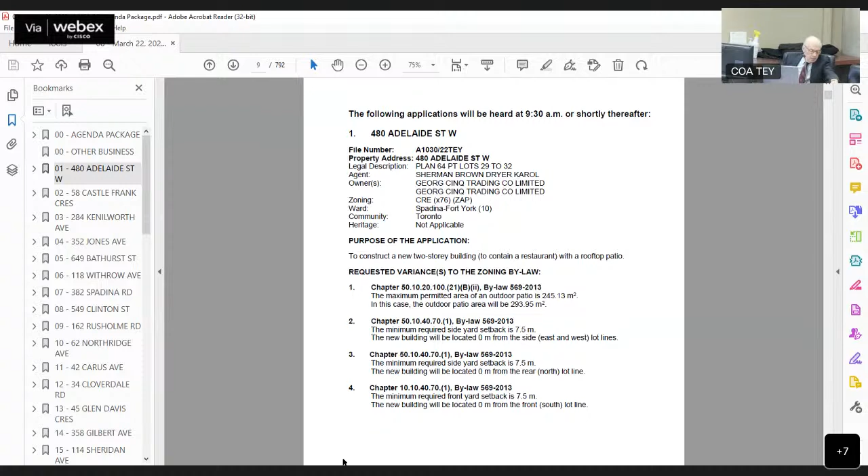Mr. Brown. Morning, Mr. Chairman and members of the committee. I'm happy to tell you, as of late last night, you probably should have had a letter from 490 Adelaide indicating that they've withdrawn all objections, so we've resolved their concerns. I'm also wanting to start out by saying thank you to staff who really did a great job in working to provide responses on our application, Simon in planning and the urban designers.

It resulted in the landscape plan that's before you. Jacob from the committee has done a great job, and Nicole and Sabrina. So I just think that ought to be said at the outset because they helped us get through the process.

Mr. Chairman: Is Mr. Artenozzi on this call? Mr. Brown: I don't think so because they signed off. They sent a letter of support in last night. Okay, thank you. Thank you.

And he and his clients and our client and myself met into the late hours and figured out a resolution. So they're pleased with the landscape plans we've shown, the site plan we've shown. I can take you through the slides that we presented. It's fairly straightforward. They're taking down a 4-story building and putting up a 2-story restaurant use with a rooftop patio.

Staff asked us to do detailed landscape plans, which we did. That was sort of asked for late in the day, but in any event, our landscape architects did a great job in getting city staff what they wanted, and you have a report that has conditions that we support.

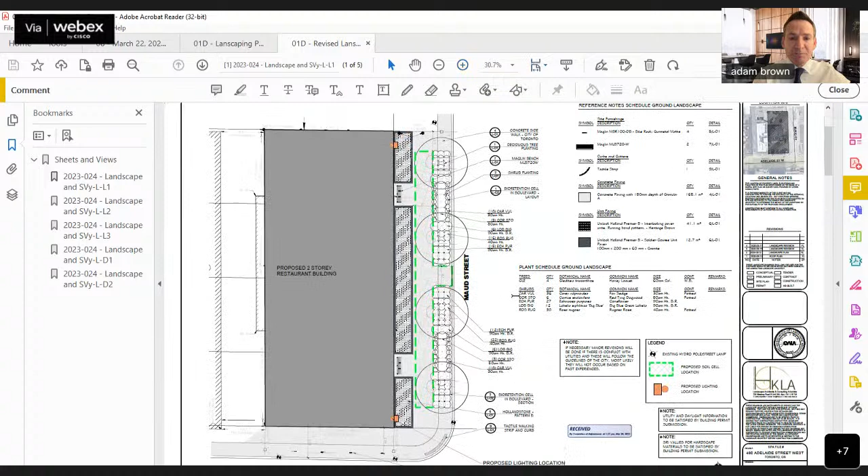So they're both from HKLA? Is it at different levels, is that what I'm... We added more improvements, got this material really late, so I apologize for it not being up to date. It happened late, we got the request about a week ago. So there was a second set of HKLA plans because they wanted more detail on the streetscape.

Oh, okay, so it's basically the same indicated proposal, just with more detail. Correct. Okay, thanks a lot. Thank you. Okay, any further questions, comments?

Odd, go ahead, Nimrod.

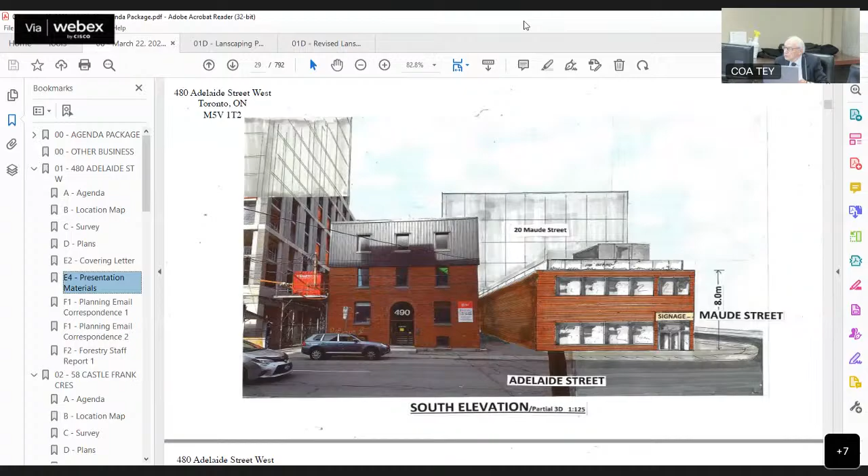I think that the variances before us are minor in nature. I think the development is appropriate, and I would move approval of the variances subject to urban forestry condition number 3 and subject to community planning conditions. I'm not sure if we need to specify which landscape plan we're referring to in those conditions.

Seconder? Is that here? All in favor? Have your approval. Thank you, sir.

Excuse me. Mr. Chairman, I cannot hear you. I can hear everybody very well, except the chairman. I'm practically swallowing the microphone. Can you hear me, Yim? Yim, can you hear me? Yes, better, much better. You have to speak really close to the mic, I think. Well, I can't get any closer. Okay, all right, thank you, otherwise you'll eat it, right? Thank you.

All right, number 2, 58 Castle Frank Crescent.

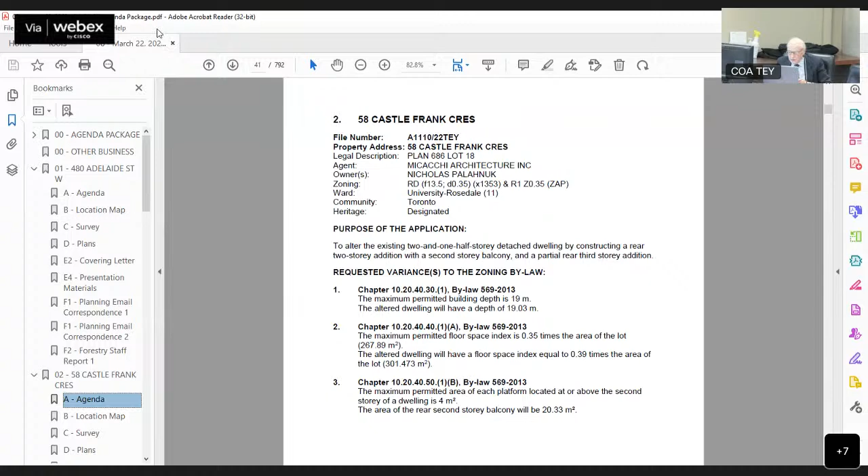Thank you. I don't think we need a presentation. I have one question with respect to the variance number 3, the size of the balcony. Is it 5 times the area as permitted? That's correct, yeah.

We did submit an extra page just highlighting some of the two other balconies on this street that were also approved previously as precedent that were greater than ours. And then in our drawings, the last page is a 3D perspective that shows what we're proposing.

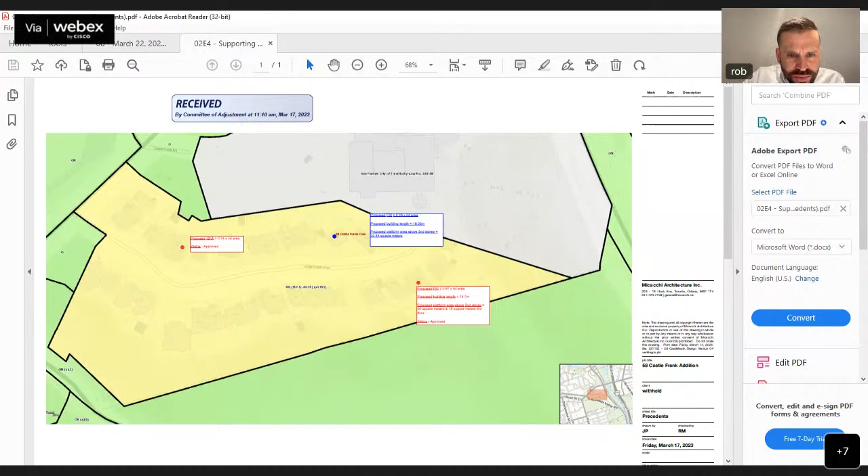So with these two, so I can't read the numbers on there. Let me pull it up myself.

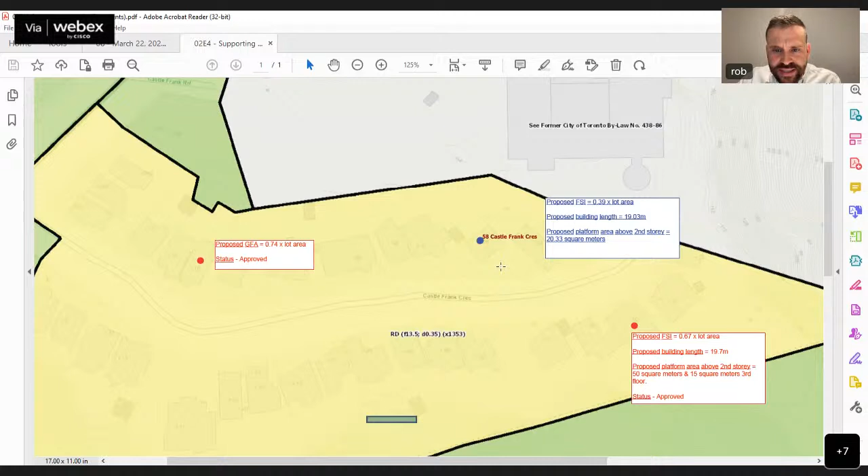So that is for 65 Castle Frank across the street, and then 2 houses to the east. That one has a second floor platform of 50 square meters, and then a third floor platform of 15 square meters. And then at 18 Castle Frank, which is 6 houses west of us, oh sorry, I misspoke, that one's just showing that the GFA is greater. So we have one precedent for

second floor platform across the street that was larger. And then we've included a rendering on the last page of our drawings that shows what this addition would look like. We're limiting the shape of our balcony to be closer to the side wall of the neighbor to protect the views of our neighbor to the east of us. That would look more into their backyard. So the balcony is just located on the west side only of the second floor.

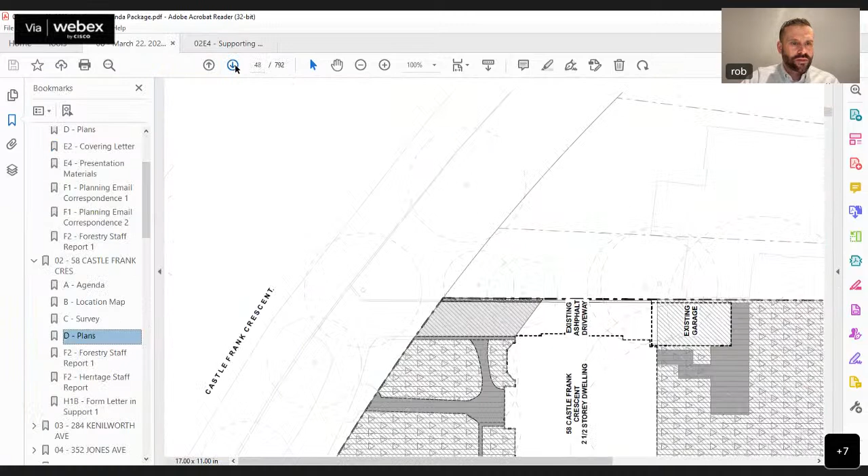So I think the last page of this PDF is maybe helpful to see. Yeah, this page. So on the second floor, there's this kind of a bay window or this framed thing that sticks out a bit, and then the platform, the balcony is just limited to be in front of that area only.

What about overlook? So maybe if we go back to the second floor plan or the site plan, what we can see is there's a house, like all of these houses are kind of angled a bit. And so the balcony that we're proposing is on the west side. So the house to the left of us, we're kind of close to their side wall.

We spoke to that neighbor. We reached out to everyone in the neighborhood. They didn't have any major concerns. We showed them a rendering of what we can see from the balcony, and they have mostly trees that obscure the view, or just the side of their house.

And then because our balcony is so far over to the west side, the neighbor to the east, where we could see into their backyard, we've pulled the balcony edge back so that the rest of that addition is blocking the view down into the backyard.

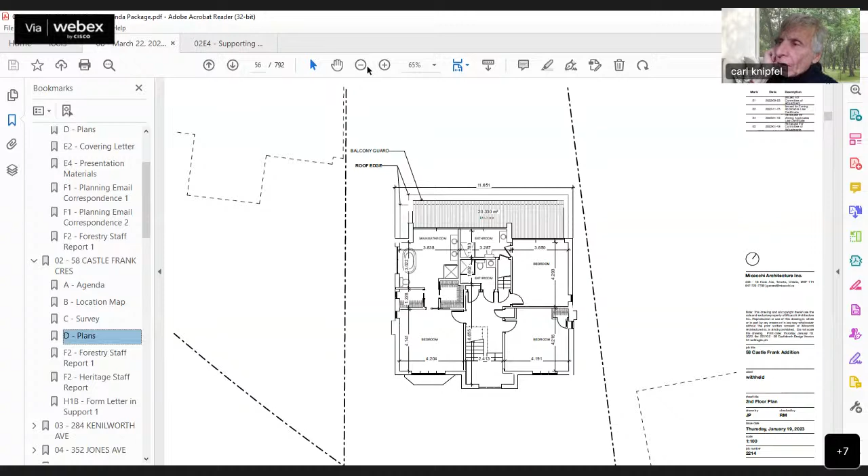It might on the second floor plan show the outline of that more clearly. Excuse me, I'm now confused. You keep referring to the balcony being closer to the west property line, but it's actually closer to the east property line, is it not? If you look at the survey, the garage is actually on the west side, correct, and the balcony extends further to the east.

So to the chairman's question, there is, I would argue, a privacy concern to the east, and the balcony needs to be screened on the east side. The other issue is the one you mentioned, which is precedent. The bylaws require that balconies be really limited in size, and your justification is that the committee's approved bigger balconies before, which would just add further proof that we should have bigger balconies, contrary to where the bylaw is going. Can you explain why the balcony is as large as it is?

I realize you've got a fair size rear yard and it's a fair size building, but the balcony is pretty big, and I'd just like to get your take on why it's that size.

Quite simply, it's just the roof of that addition, and it was just something to walk out onto. I don't think it's going to be used that much, but we wanted to finish the top of it, like from the bedrooms. There's one bedroom with a view looking back, and we didn't want to just see a flat roof. We wanted to cover that in nice decking instead, and maybe have a big potted plant out there. Yeah, that's pretty much it.

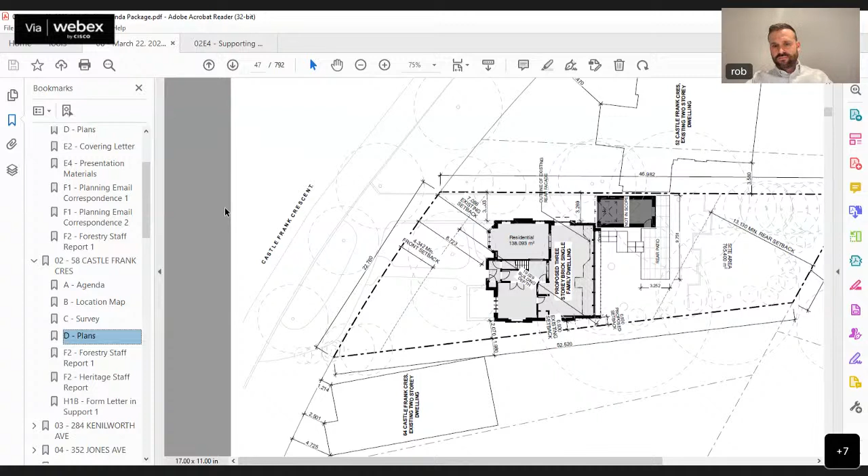Okay, any further questions, panel? Any comments? Yes, Yim? We're in committee now. I can make a couple of comments. Can't hear you, are we in committee now? Yes. Okay, I have a comment to make.

The size of the balcony sort of stands out to me too, but when I listen to the explanation and look at the site plan, these sites are staggered, and the applicant said they have talked to the neighbors. It's staggered in such a way that you really have to turn to stand on the edge and turn back to look at any of the backyards. In that sense, I do not think there's a privacy concern. But if some members think we should put some privacy screen on the west side, I do not object to that. I can support this application because besides that, I think the variance is minor in nature.

Further comments? Yes, Carl? Thank you, Mr. Chairman. Unless I've got the wrong information, which is possible, if we look at the drawings, I think it's the east side that needs screening, not the west side. The west side, the houses are staggered, and the balcony is set back from the property line on the west, which I don't have the number for, but I don't see a privacy concern to the west. I see the privacy concern to the east.

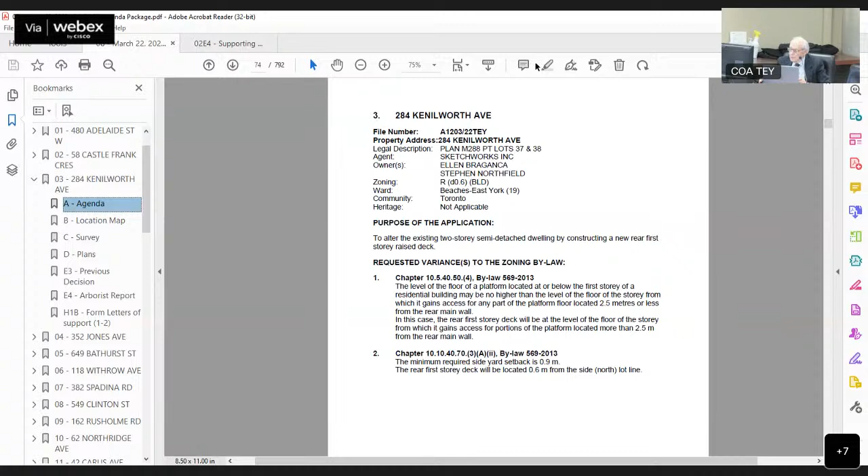Thank you. Panel, any questions? I didn't have any questions. I'm ready to put forward a motion unless someone else has a question. Any questions, anybody else? Yes, Carl.

It's not a question so much as a suggestion. Nimrod, I don't know whether your motion is going to have conditions, but I would argue that we need to have screening on the north edge of the deck. And I had a question for the applicant: is whether the deck abuts another deck on the south side? The deck, there is a gap between the deck on the south side. It is not directly attached, but the neighbor does have a deck as well.

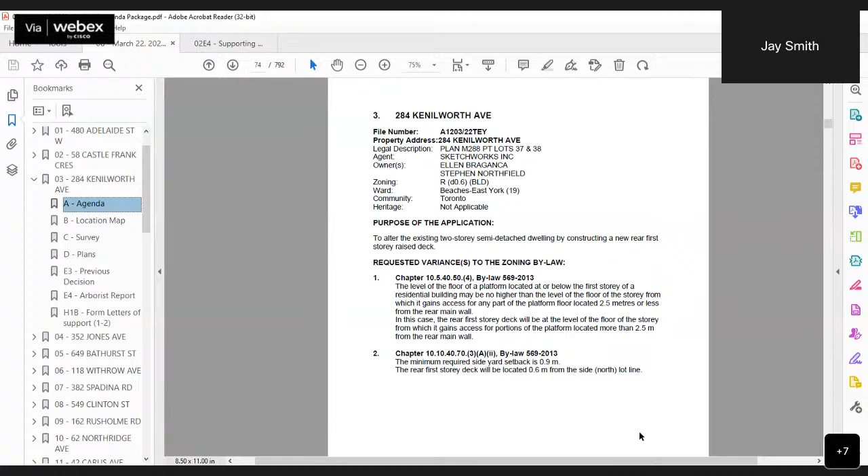Given the topography of the land, we're almost 9.5 feet from ground floor to the backyard. So a lot of these homes do have decks, and I would have no objection to screening on the north side. So then my question was, do you need it on the south side as well, or is there already a screen there for your neighbor? The neighbor does have a screen.

Okay, good enough, thanks. Sorry, Nimrod. No, that's great. So I'd like to put forward a motion to approve the variances. I believe they are minor in nature, and I note that there are letters of support from both adjacent neighbors. And add a condition that there be privacy opaque screening on the north side of that deck.

Carl, you second that motion? Yes. All in favor? Have your approval, sir. Thank you, Mr. Chair. Number 4, 352 Jones Avenue.

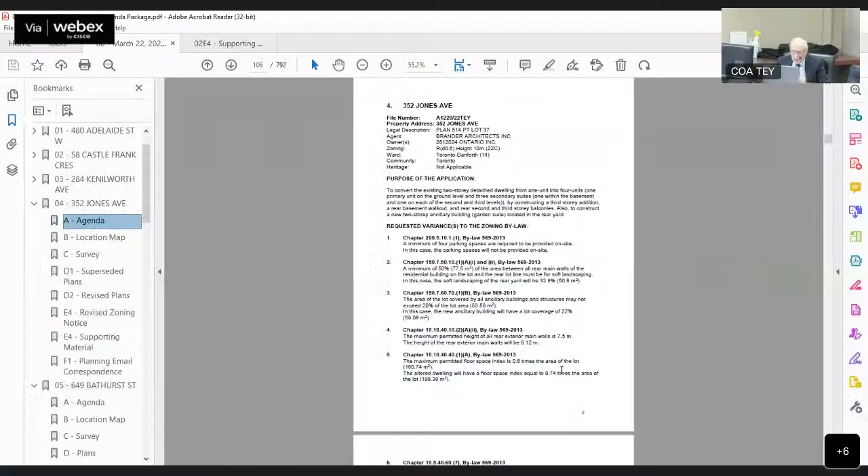The purpose of the application is to convert the existing 2-story detached dwelling from 1 unit into 4 units: 1 primary unit on the ground floor and 3 secondary units, 1 within the basement and 1 on each of the second and third levels, by constructing a 3rd-story addition, a rear basement walkout, and rear second and 3rd-story balconies. Also to construct a new 2-story ancillary building, a garden suite located in the rear yard. With this application, we have material submitted by the applicant, correspondence from planning, and support from someone whose address is unknown, Mr. Brander.

Adam, you've been unmuted. Good morning, Mr. Chair and committee members. My name is Adam Brander, and my address is 49 Bolton Avenue in Toronto. I'm the agent, the architect for the proposal at 352 Jones Avenue. Okay, so there is someone registered to speak, not necessarily in opposition, but I think you better give us a brief presentation, sir. Certainly.

Just to update first, if we could: the public notice originally indicated 6 variances and updated zoning notices are on the file. If I could transcribe what that means for the public notice: Variance 1 should read 1 parking required, 0 proposed. Variance 2 proposed is reduced to 33.1%, or 51.3 meters squared for rear yard soft landscaping. Variance 3 for the garden suite coverage is removed. And variance 4 for the permitted height of the rear wall should read 7.5 meters is permitted, where 9.12 is proposed.

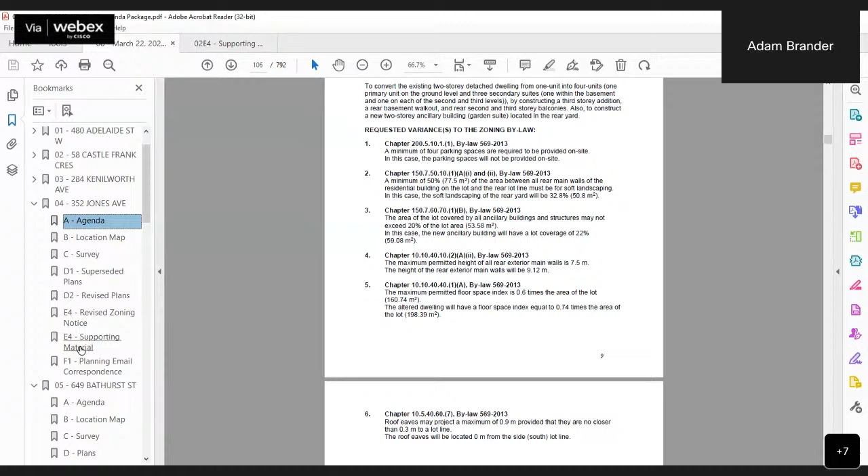If we could bring up support material sheet 4, please, just a couple pages down. Yeah, the outlined area in blue there is a pre-existing neighbor vehicular easement that wraps around the property, but technically is on the subject property. And because it's in favor of the neighbor, there are no permissions to alter or provide soft landscaping in this space. Our zoning examiner actually went back to the source on this item and consulted with the planners who wrote this recent bylaw. And those planners said there's actually nothing explicitly written into the bylaw at this point just yet for these instances. There's a recognition and an acknowledgement that it's an issue to be resolved. They felt it was something that could be explained at committee for the time being.

If we were to exclude the right-of-way area from the rear yard, the proposed percentage of soft landscaping would be 44.6%, where 50 is required. Or if we were able to landscape that area, it would be up at 58.9%, an as-of-right condition in that qualification.

Additionally, the proposed soft landscaping in the rear is actually an improvement over the existing condition. With that back and forth with planning and zoning, planning had no further concerns with that. These are my initial submissions in support, and I'm happy to answer any questions.

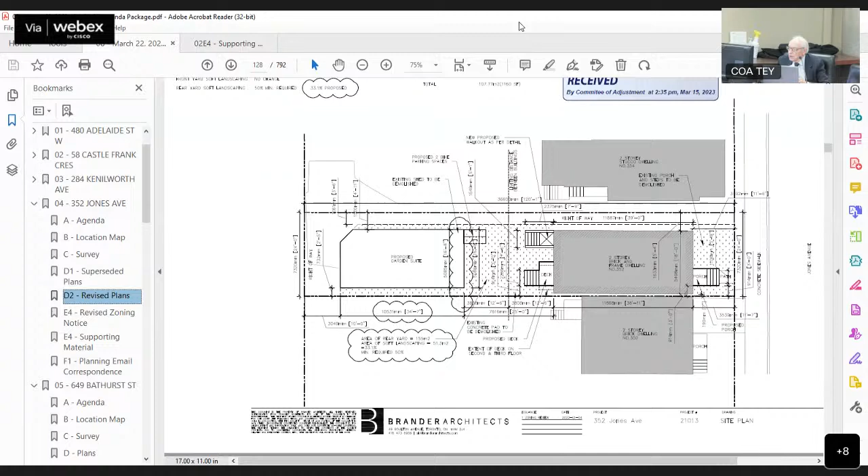I have no more comments, and I think it's good that they have deleted variance 3. I'm actually quite impressed that they're putting a garden suite with so few variances concerning the garden suite. I think it's a good approach, a good project, and I'm in support of the amended agenda.

I think they already proposed the privacy screen. I do not need to put it as a condition. So that's my motion.

Okay, it'll be as amended, Yim? Yes, I mentioned that. It's amended. So, planning condition, is that screening? I think they have proposed it on the plans. That's privacy screening already. They have it on one side, yes. Carl, did you second it? Yes, I'm pleased to. Okay, all in favor? Have your approval, sir. Thank you.

Thank you. Number 5, 649 Bathurst Street. The purpose of this application is to alter the existing 2 1/2 story semi-detached dwelling by constructing a rear third floor addition with a balcony. There will be 2 dwelling units on this lot, 1 primary unit as well as 1 secondary unit within the basement. With this application, we have material submitted by the applicant and correspondence and concern or interest from 651 Bathurst Street.

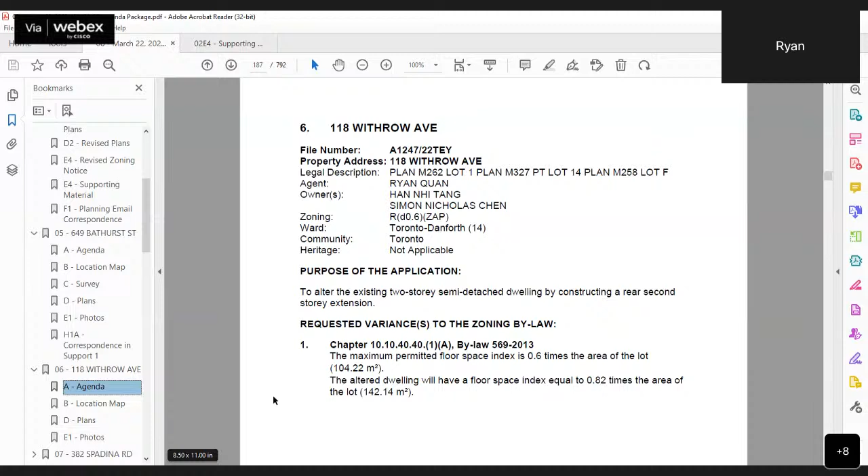Hello Ryan, you've been unmuted. Good morning, committee. My name is Ryan Quan of 29 Torrens Avenue, agent for 118 Withrow Avenue. All right, I think this is very straightforward, I don't think we need a presentation. Panel, do you have any questions?

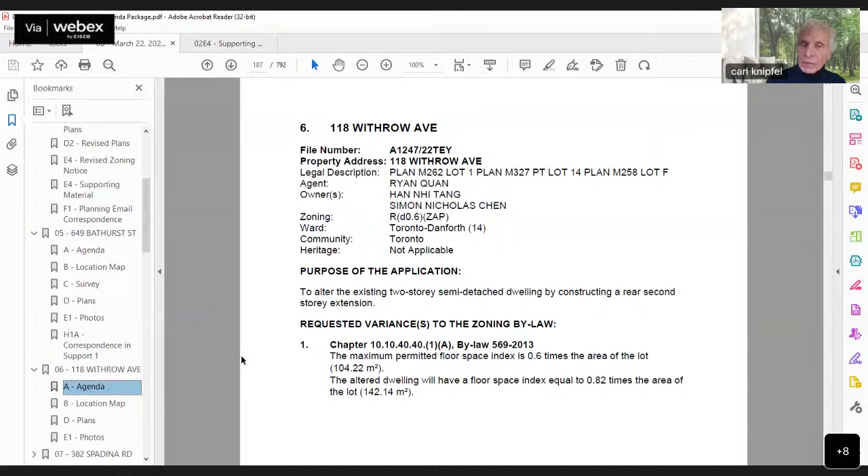Carl: Thank you, Mr. Chairman. Mr. Quan, a very quick question, I had some difficulty with your drawings. The purpose is a rear second story extension, is it a 2-story extension or is it just on the second floor? It's just a point of clarification. It's a second floor addition over an existing 1-story addition. Okay, that's good, thanks very much.

Do we have, yes, Nimrod? Yeah, I'd like to move a motion. There's only one variance and I believe it is minor in nature. I would move approval with no conditions. Seconder is here, all in favor? Im, are you in favor? Yes, okay. The application's approved, sir. Thank you, committee.

Do we have Mr. Yu? Don, have him? Excuse me, I apologize, could you hear me right now? Tony, can you speak closer to the microphone please? Oh, I'm so sorry, could you hear me right now? It's kind of like Microsoft, we need you to... speak up, sir. Yeah, could you hear me? I'm sorry, the microphone doesn't seem very clear. Yeah, now we can hear you. Oh please, I sincerely apologize.

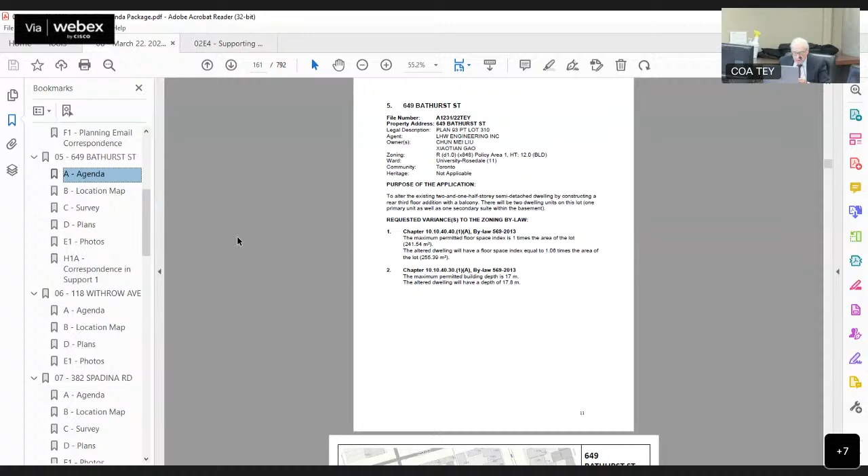Good morning, Mr. Chair and the committee. My name is Tony Yu, and I'm the agent. My address is 2347 Kennedy Road. I'm here today on behalf of the owner of 649 Bathurst Street.

Okay, can we have a very brief presentation as we have some opposition? Sure, for sure, please let me briefly introduce this application. The application was intended to do an interior alteration and propose a new flat roof on the existing roof. The reason that two variances were triggered regarding the building length and the FSI is because there is an existing two-story addition that hasn't been legalized yet.

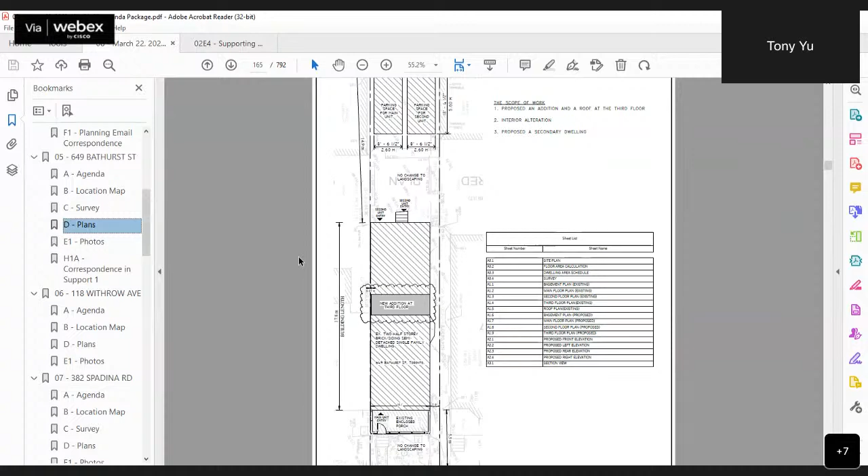If you look at the survey, could you pull out the survey please? You can find that about 2.5 meters metal siding addition on the rear, which does not match the city record. The owner bought this property about 2 decades ago, and this addition was already an existing structure back then. During the last 2 decades, the addition has not imposed any dangers like drainage or shadowing issues. Therefore, I'm respectfully asking for a relief to the variance of the building length and the FSI in order to legalize this rear addition. I'm happy to answer any question.

Thank you, so there's actually no construction at this time, well? Only a propose flat roof on the existing roof, like a dormer, flat roof dormer on the existing roof. So there's no further violation or construction except the dormer on the 3rd floor.

Okay, alright, Zahir, you have a question? Just a quick question, is the balcony on the 3rd floor an existing one, or is this one supposed to be built as well? Because there's no screening as far as I can see on either side. Well, this balcony is the new one, and there's only 1 meter depth, and this balcony hasn't triggered any variance. But the owner would be happy to add the privacy screen on the side. And that would be north and south sides? On the north side. And south side? Yeah, both sides is fine.

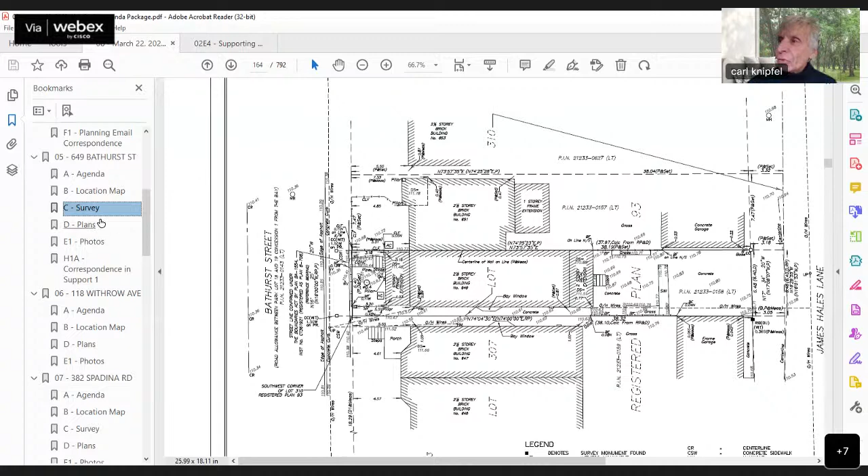Both sides, thank you. Carl, did you have a question? I just wanted to clarify, Mr. Chairman, you asked the applicant if there was any new construction and he said no, but in fact, the balcony is new, and so that is new construction. The other issue I think is, I'm not sure that the screening on the edges is necessary based on the location of the adjacent properties, but it's not going to hurt. The larger issue to me would be to tie the balcony to the drawing, let me see, drawing A19, which is the 3rd floor plan. The reason for that is because the balcony is contiguous with a roof, and so it would be very easy to basically use almost the entire roof as a balcony. I presume we would like the balcony to be as shown on that plan, so I think that might reasonably be a condition. Okay, alright, Wing Chan.

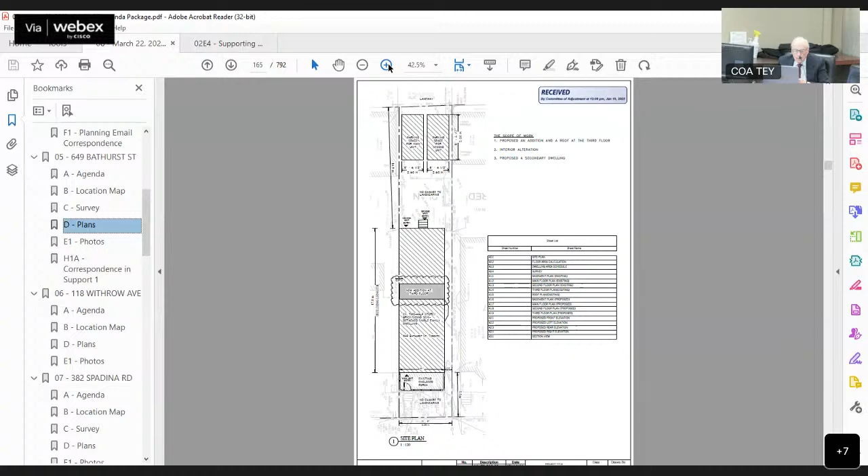Could you tell us what your concerns are? As stated in our letter, our main concern is the privacy of the additional balcony being built, very close to the bedroom window, and asking if we could have additional privacy screens on the north side, so that we can protect privacy into the bedroom window. Additionally, because the construction is directly above our entranceway where we have young children going in and out often, we just wanted to see if any conditions can be put in to protect that space during construction. And thirdly, just because we are attached to the house, we're just concerned about general protection of the roof and structures as the owners do the construction.

Well, we can help you out with a privacy screening. We've already addressed that issue, and it'll be part of any motion, but we can't address the construction issues. It's not part of our mandate. You have to discuss that with the neighbor.

I don't know if there's going to be any more construction. Is the balcony there? No, it's not there right now. Well, then you'll have to address construction issues with the neighbor. Okay, thank you. And I appreciate the consideration for the privacy issue and the offer from the neighbor to put in privacy screens. All right, thank you.

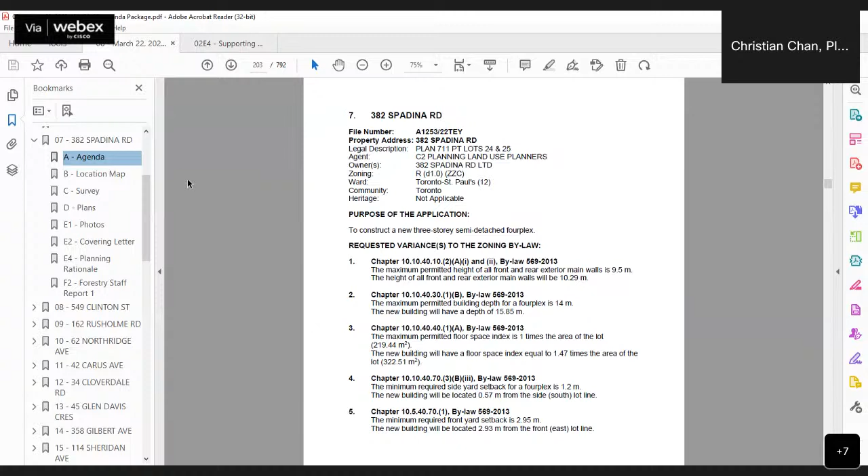Thank you. Panel, any questions? Comments, or do we have a motion? Carl? Mr. Chairman, could the applicant clarify that there's been consultation with the attached semi? We've consulted with city planning as well as the attached semi, so there isn't any concerns noted in the file record on the AIC. And also just to note that we did have a brief conversation with urban forestry just to make sure that the conditions are going to be satisfied.

And the other question I have, it appears to me, if you look at your front elevation drawing, the stairway is really dominant. Do you have any perspective drawings that would indicate the stair in your presentation drawings? Are they fairly accurate? Because the stair recedes from view since it's up 3 stories from the ground. Sorry, sir, are you speaking with regards to the basement stairs going to the basement unit? No, the stair to the roof. The stairs to the roof, yes. If you can go to page 10 of the planning rationale, there is a front elevation view.

That shows a perspective of the proposed roof enclosure that accesses the roof deck. It is receded back from the point where the sloped roof goes up, matching the adjoining building, and then it's stepped back to reduce the appearance of that massing onto the streetscape. So that's not immediately apparent when seen on the front elevation. Yeah, that's the point I wanted to clarify.

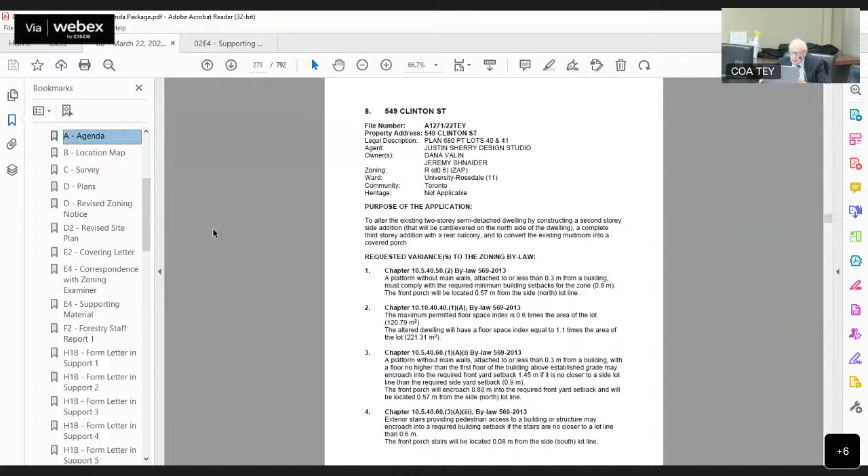Off the top of my head, I cannot recall. If you give me one moment, I can let you know. The current gross floor area index is 78.35%. Okay, so we are currently over as well. Yeah.

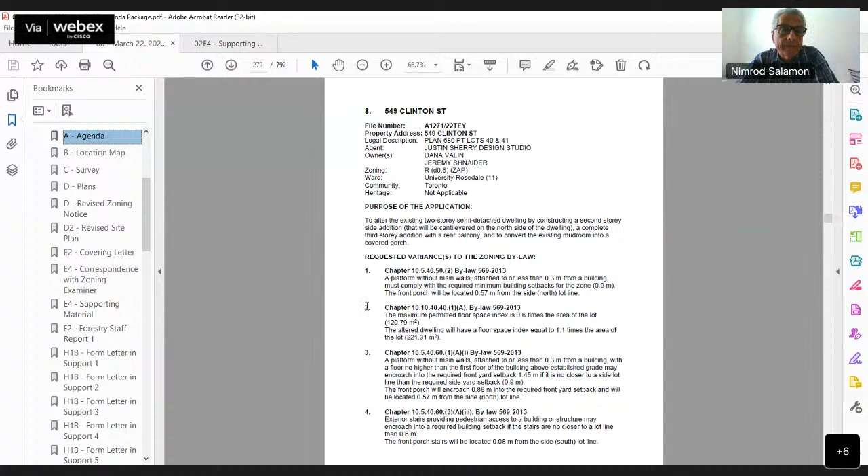Mr. Chair, I think, is there an amendment being made to variance number 6? I think there was some letter to that effect. Through the chair, if the applicant can please go through the requested minor variances as per the revised zoning review that was received, just to clarify if any of the variances have changed from the original public hearing notice. Yes, so number 6 in particular is the only one that changed, and that's with regards to the soft landscaping.

In the existing condition right now, it provides 0% landscaping. We are currently adding an additional landscape area. It seems like this one is the old one, but we are adding some soft landscaping to the front. If you give me one moment, I can let you know how much that is.

So we're going to add another additional 29.82%, whereas we have 0% currently. Are there any other changes to variances? No, that is it. Okay.

All right, panel, do you have any further questions or comments? Yes, Carl. Would the applicant have any concerns with screening the balcony on the north and south sides? There will actually be some screening on the south side as it's semi-detached. In particular, there's many houses on that street that do have that same screening effect. On the north side, I'm sure the client would be happy to have a screen, so we can add that in. Thank you.

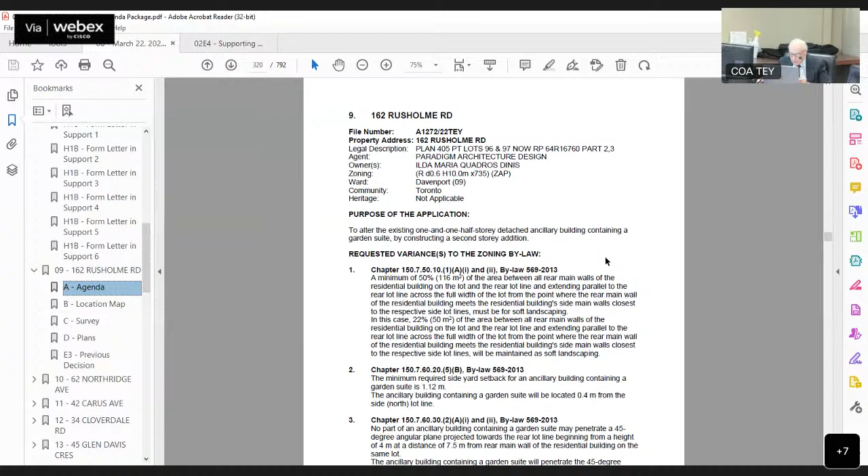Yes, we have somebody else on, so perhaps you could give us a brief presentation. Sure, definitely. The purpose of our application is to extend the existing second story of a garden suite at the back of the property. The variances are as a result of all existing conditions. Our intent is to only extend the second story to align with the existing ground floor, and we will not be encroaching any closer than the existing bathroom on the ground floor. So if you look at sheet A2.2, it would be the south elevation. As you can see, we are not proposing to be any closer than the minimum required distance from the main dwelling. We actually are over the required 7.5 meters with an 8.6 distance. We are not getting any closer to the ground floor. And the side yard setback is as a result of us trying to align with the existing walls on the second floor.

Mr. Magana, I was a little confused by this application because you attached a previous decision which approved a garage at the back, but now your application says an existing garden suite. Yes, so the owners 2 owners ago on this property had applied to add the second story addition to the garage. The owners, after that, created a suite without proper legalization. So our application is also to legalize this garden suite as a legal residential suite.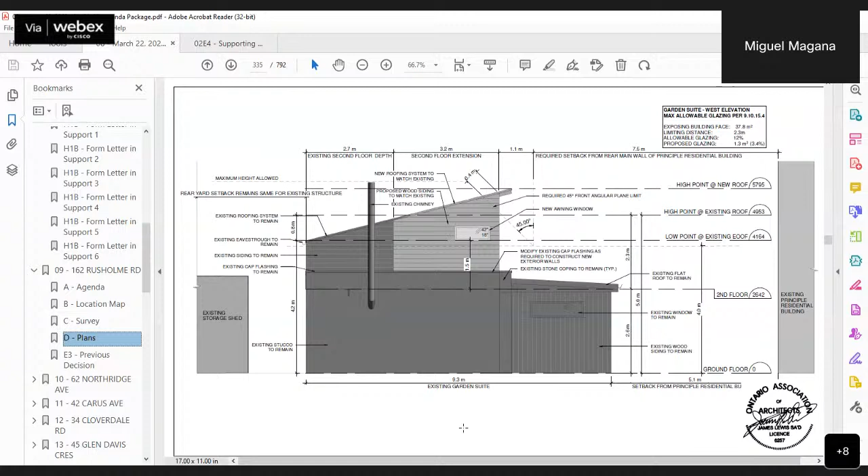All right, so, Paul, I think we should change the purpose to read: to permit the existing 1.5-story detached ancillary building as a garden suite and to construct a second-story addition. Correct, through you Mr. Chair, we can.

I just would like to check the system to see if an order to comply has actually been issued for this property. Perhaps the applicant can weigh in. Have you actually been issued an order to comply violation? We have not received one. And there's also Jim Sa'd on the line, who was the original applicant. He was having some traveling issues, so I was only here as a standby. I'm not sure if the moderator could also patch him in.

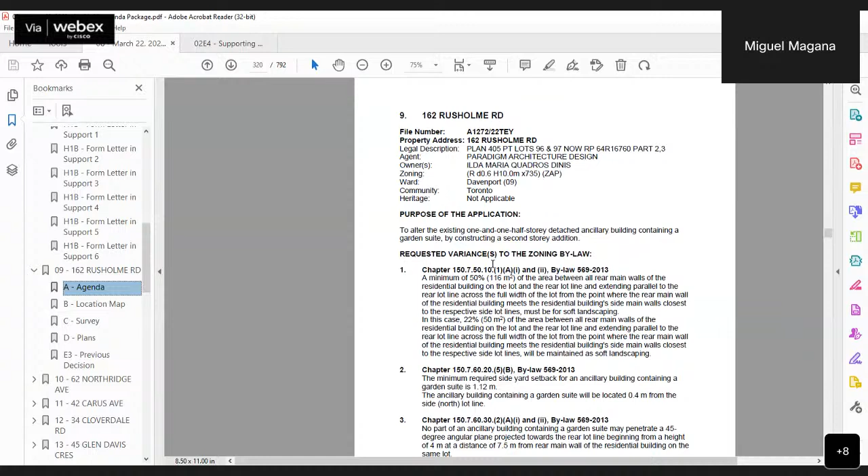Through you, Mr. Chair, we can see if there's anybody else on the line to speak regarding this. Jim, you've been unmuted.

Hello, can you hear me? Yes? Hello, can anyone hear me? Yes, speak closer to the mic, please. My apologies, my name is Jim Sa'd of Paradigm Architecture and Design, and I was supposed to be the agent on behalf of the owner at 162 Rusholme. We're having trouble, you're fading in and out. If you could speak close to the microphone, I think we'll hear you better.

Sorry, can you hear me? Yes? Okay. My name is Jim Sa'd. I'm supposed to be the agent on behalf of the owner for 162 Rusholme. My apologies, I am overseas, and I'm not sure why I wasn't called first, but Miguel stepped in for me, which he gave a good presentation generally, but I did want to point out a few things.

So yes, this was an existing garage at some point, and prior to my client purchasing this property, she is the second owner to inherit what was a garage that was 1.5 stories in height. The previous owners, as you can see from the previous notice of decision, had legalized a second story to the garage. And at some point prior to my client purchasing the property, and even the owner prior to her, the owners that got the committee decision to extend the height of the garage had converted it into a dwelling without going through the proper means of obtaining permits and going through committee of adjustments, as is obvious.

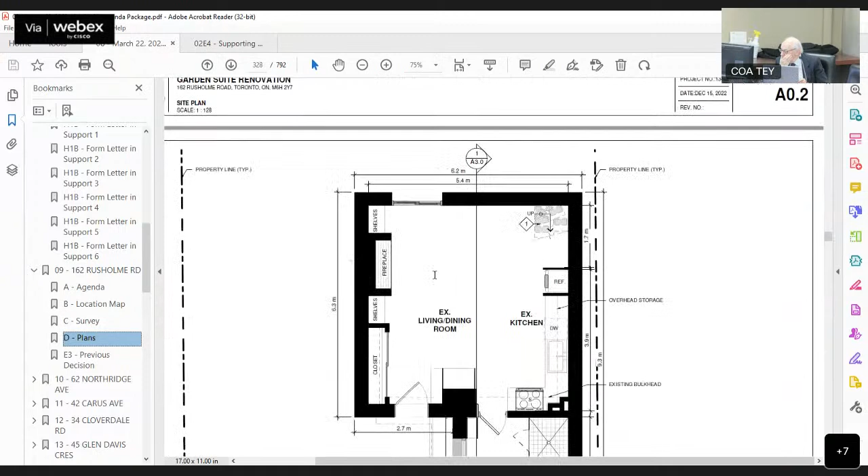Actually, if we could stop at this on this sheet, that's perfect. That demonstrates the extension that we're asking to the existing second story of the garage, formerly the last incarnation on record for this structure. So again, you can see by extending out the second floor to make it usable and allow us to insert a proper OBC compliant stair on the interior to access a bedroom, we're still very far off from the main dwelling unit. In excess of the 7.5 meters, we're at 8.1 meters away.

So I think the client is looking to do the right thing by legalizing this dwelling as a garden suite. She also is interested in not taking up space, she lives alone, so there's no reason for her to occupy the main house or portions of it, which have been divided into 2 and 3 bedroom units, which she rents out, which according to current municipal policies is the direction that we're trying to achieve in terms of increasing density. So she has taken over this modestly sized dwelling unit for her own use, and she's just trying to make it as livable as possible.

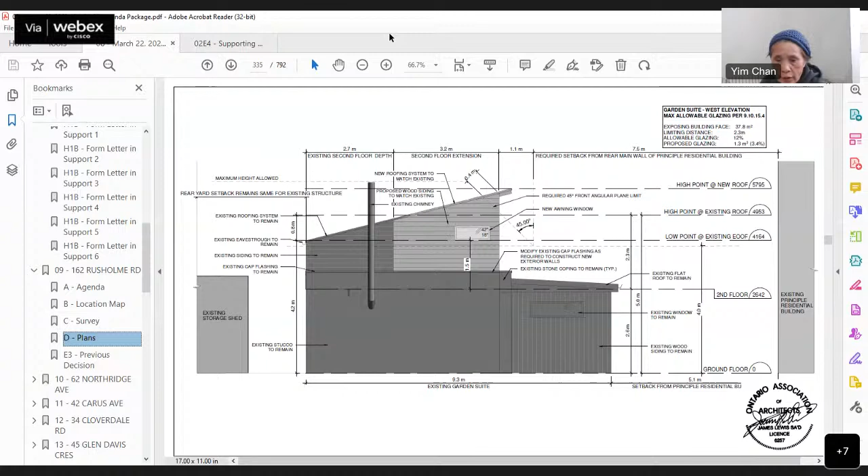Yes, I just want to clarify, if we can look at your site plan. I just want to know the landscaping areas that you indicated in between the house - there's a little patch of soft landscaping or existing landscaping. Also, I want to know what is the area between the garden suite and the lot line, where the little shed is. What is that material?

Those are brick pavers, and they're all pre-existing. So in actuality, for this application, we're not touching anything on the ground floor or site level. Understand, that's not my question. My question is, on your site plan, where is the soft landscaping? There is a small patch between the main house and the proposed garden suite, as well as around the perimeter of the garden suite.

It's all pre-existing. So everything else is asphalt paving or permeable pavers, or what material? Everything else is hard landscaping. There is the driveway, everything leading up to the parking space is hardscaping, asphalt paving if you will. The entire rear yard is brick pavers with limestone screening between the pavers, which allows a decent amount of water infiltration. And then the area between the garden suite itself and the main house, if I'm not mistaken, it is all sodded.

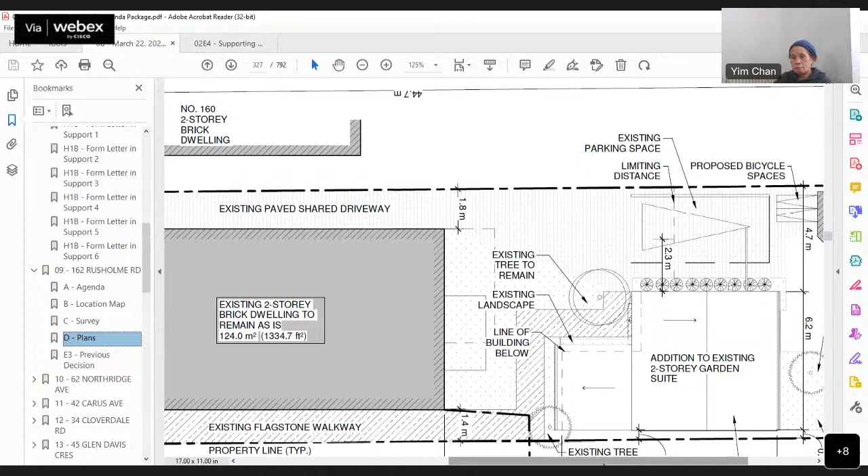Through you, Mr. Chair, just to clarify the earlier question regarding the description of the property, there is indeed no violation or order to comply issued for this site. Therefore, in terms of amending the description, we could say to permit the garden suite, but it would not be to legalize and maintain. We can amend the description to state to permit the garden suite and to construct a second-story addition. All right, panel, do you have any further questions or comments?

Thank you, Mr. Chairman. I share the concern about the landscaping, even though it's existing. The architect's explanation has been really helpful, and I appreciate that, particularly because you're overseas. But I don't think this is a reasonable landscape provision in this day and age. I realize it's old and existing, but it's the one aspect of this application I'm unable to support, which is variance number 1. I'd be happier if we had a higher percentage closer to the bylaw minimum of 50%. As it presently stands, I'm unable to support variance number 1.

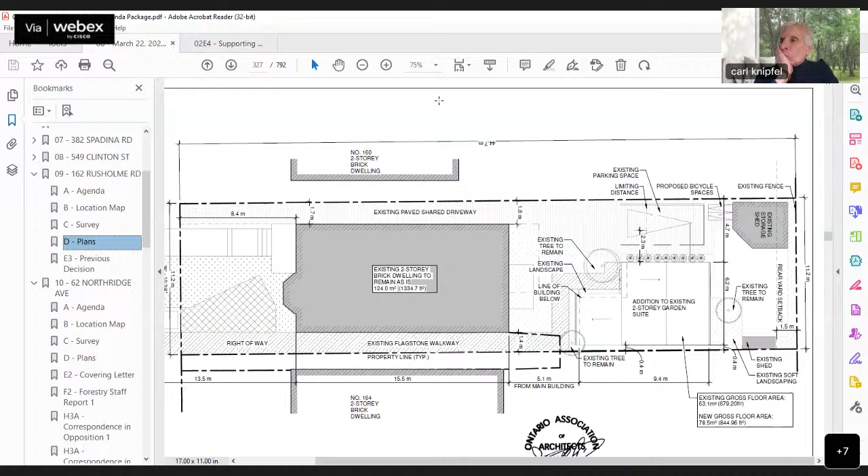We don't need the solution today, we just need the percentage and the square meters today. Hello, committee? Yes, so if we were to remove the walkway and exclude just the right-of-way shared with the neighbors, we could increase our soft landscaping to 45.5 square meters. You could increase it to 45? Already 50. Yeah, you're already at 50. Do you mean you increase it by 45 square meters? Oh, I didn't include a portion of that.

It would be to 58. So we would only really be able to increase it by 8 square meters. And the percentage would only be about 24%? Correct. And that's by excluding everything that's not required for the driveway, for the right-of-ways.

And just provide a small access from the driveway to the door. But as the other committee members said, we can look at how we can also increase it behind the garden suite. Just based with our existing constraints of the driveway, the parking space, and the right-of-ways on both sides, we can't increase it more than that.

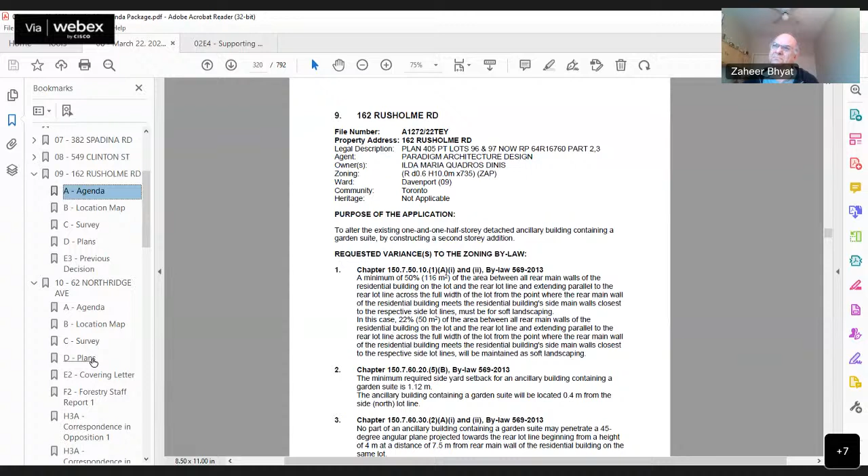Right, how much can you? We can look at adding some more in the back. Yeah, let's see. But this only deals, this 50% only deals with the area between the garden suite and the house. Correct. And we just have the constraints of existing right-of-ways with both neighbors, and just the doorway and the existing structure.

So how much soft landscaping can you get behind the garden suite? I think we could increase it to 75 square meters. Which would be, what percentage would that be? Well, actually, that wouldn't count in that calculation.

It'd only give you another 17 square meters. And I guess to clarify, the portion behind the garden suite is not calculated in the bylaw. So I guess that would be the exception made. But it would help, Chairman. It would help the panel make a decision because that can be like a condition.

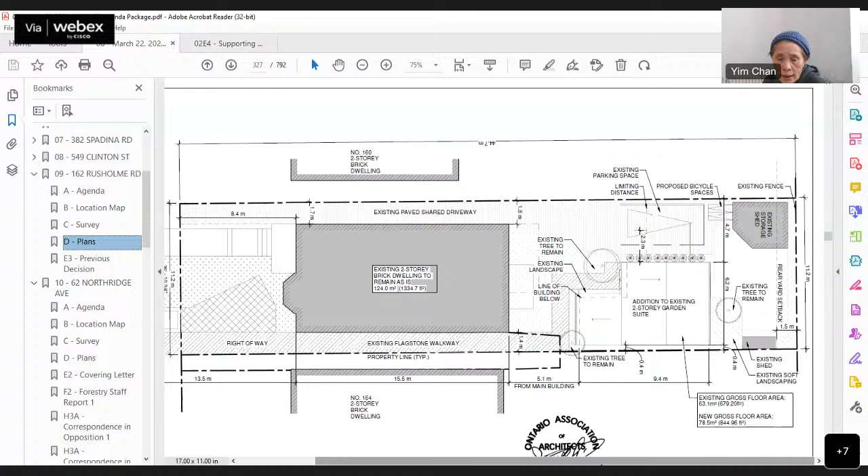Panel, yes, Yim? Mr. Chairman, I suggest that because it's not part of the variance, the space behind the garden suite, we can put it as a condition saying that space is to be soft landscaping, which constitutes 17 square meters. Yes, we could do that.

Okay, so let us go into committee. Any further questions or comments? Or do we have a motion? I think what Yim indicated is the best we can do at this point, or we've been told it's the best.

58 square meters at 24% between the buildings, and 17 square meters behind the garden suite as a condition.

Jim, did you want to make any comment? Yeah, with the amendment and also the condition of additional soft landscaping, I'm ready to support this because I think the garden suite is more acceptable and is quite a modest increase.

So I move for approval with the amended variance number 1 from 22% to 24%, which is 58 square meters. And given the condition that the area behind the garden suite is to be soft landscaping of an area of 17 square meters.

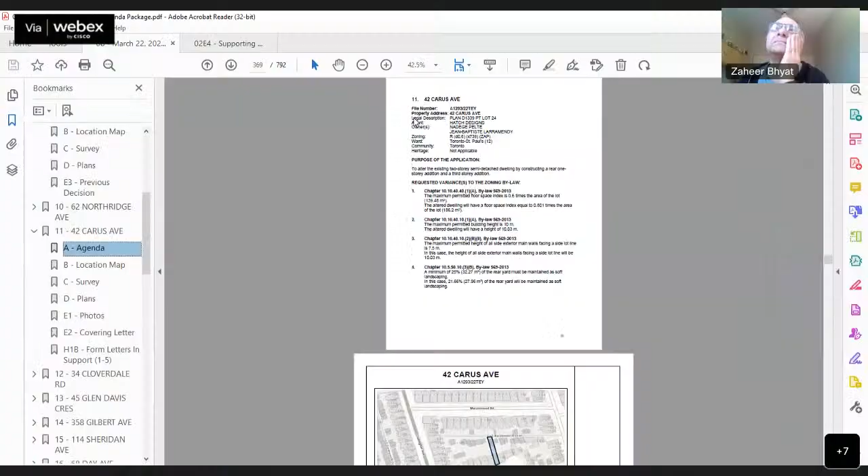Purpose of this application is to alter the existing 2-story semi-detached dwelling by constructing a rear 1-story addition and a 3rd-story addition. With this application, we have material submitted by the applicant and 5 form letters in support.

Mr. Hatch. Jonathan Hatch, you've been unmuted. 42 Carus Avenue, 6 Bishop Street, Toronto, Ontario. We're having trouble hearing you, sir, could you speak closer to the mic please? Is that better? Yes, much better. Perfect. Jonathan Hatch for 42 Carus Avenue.

Okay, this looks reasonably straightforward. Do you have anything you want to say before we take it into committee?

Sure. This is a reasonable application. It's in a neighborhood that's under a large amount of development. It's below the average FSIs of what is being proposed in the area at 0.8. Three-story houses are common in this area. We're keeping the original front facade, staying on the existing footprint. We believe the character is maintained. We have a number of letters of support, including the adjacent neighbors, and I'd be happy to answer any questions.

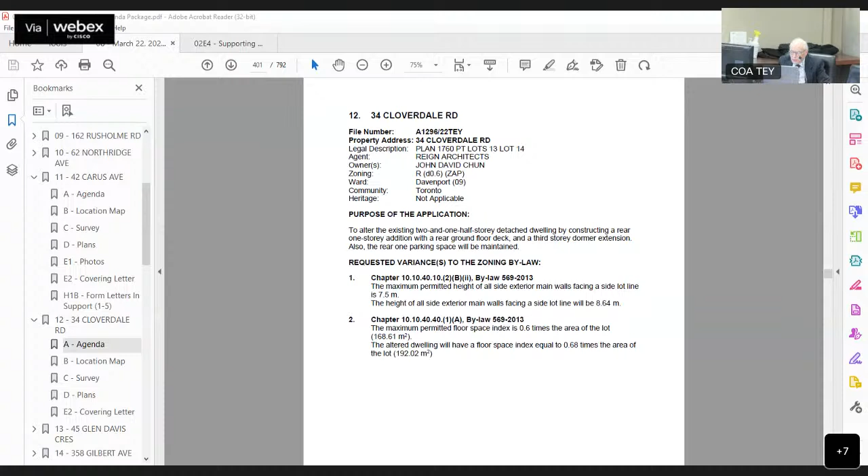Number 12, 34 Cloverdale Road. The purpose of the application is to alter the existing 2 1/2 story detached dwelling by constructing a rear 1-story addition with a rear ground floor deck and a 3rd-story dormer extension. Also, the rear 1 parking space will be maintained. We have material submitted by the applicant in support of this application.

Jacob Yabali. Yes, Chair Member, I am here, can you hear me? Yes, we can. My name is Jacob, resident at 41 Henderson Avenue, and I am the applicant on behalf of my client. Happy to answer any questions the panelists have.

Well, we have someone who wants to speak in interest, so I think you should briefly go over what this is about. Sure, you want me to elaborate a bit about the application? Just about what you're doing. I mean it's pretty clear. So we're doing a 1-story addition at the back with an extended deck, and we are adding a dormer on the 3rd floor.

Okay, any questions, panel? Okay, Diana Smykel. Diana, you've been unmuted. Diana Smykel, you've been unmuted. Up there? Can you call her? Yeah, just call her again.

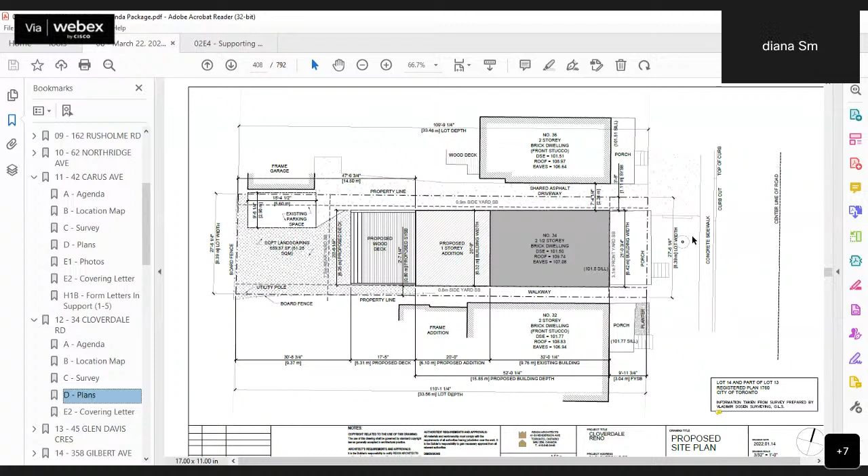When you are finished recording, you may hang up. All right, panel, we can't get a hold of this person. So let's go into committee.

Comments or a motion, Nimrod? Yeah, I think what's being proposed here is very minor. The additions are quite small and there's only 2 variances. They are minor and I would move approval with no conditions.

Carl, you second that? Yes. All in favor? Ian? Carl? Okay, Carl, you favor, right? I did, yes, sorry. Yeah, thank you, you have your approval, sir.

Lynn Huston. Good morning. Morning. Can we have your name and address for the record please? Yes, my name is Lynn Huston. I am at 49 Oakcrest Avenue, and I'm the agent for the homeowners. Okay.

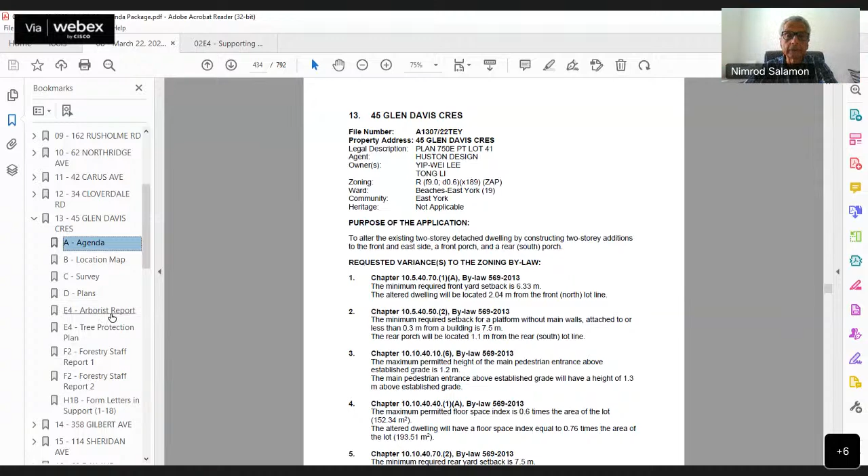Rod? Yeah, I have a couple of questions. We do have a community planning condition that is variance number 7 being removed. Yes, we've managed to work with planning to reduce to get to 94% of required soft landscaping at the front.

Okay, and also, do you have any comments on the urban forestry comments which recommend that variance number 2 and 5 be refused because it would result in the loss of a large tree? Unfortunately, there's no way to do anything on this lot without harm to that tree. The homeowners would like to keep it if they could, but it's just not practical in terms of being able to build any addition that isn't a very odd shape.

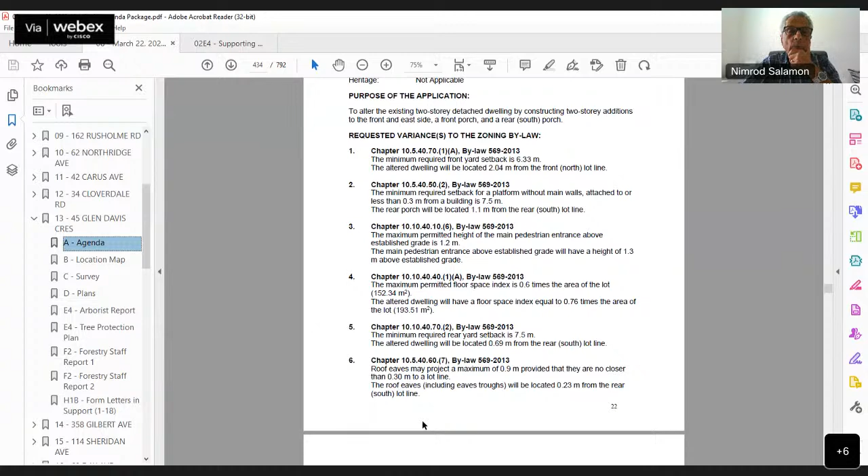So is there a way to pull up the site plan to see what exactly is causing the loss of that tree? What part of the addition? Yes. I mean, we are willing to attempt to save it, but as I said, the addition overlaps too much of the space of the tree.

Is it just the porch that is creating that problem, or is it other parts of the addition? Well, if you can zoom in on that, we have the circle of influence, it's a little bit down on the screen right now. It's the one at the bottom. So yes, we just judged that it's not going to be practical to keep it, that any work within that circle is too likely to damage it, so it would be safer to remove.

So this lot is on a corner and has frontage on 2 streets, and it's a very constrained lot. Yeah, and that is a large tree, so if it's removed, how does that impact the views? Well, there are a lot of other trees on this property, and the view, you mean to the people across the street?

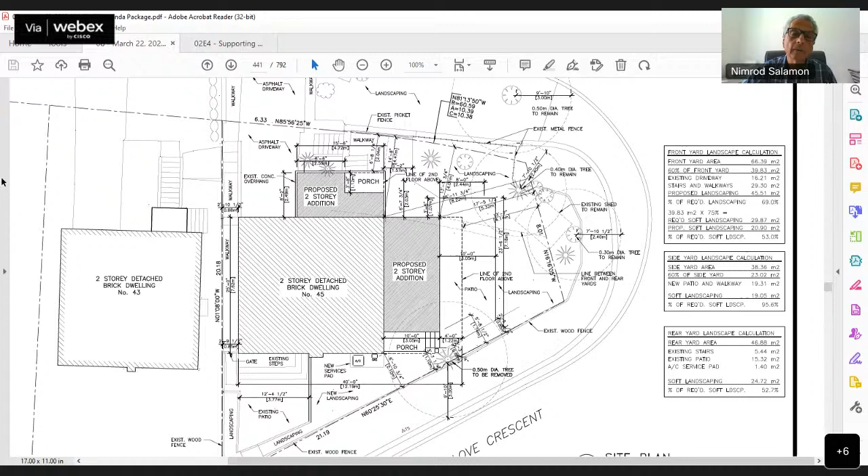Well, I guess when you look at the street view, you can see that tree is quite large, and if it was gone, how does that view totally change? Well, the area is very heavily treed. So yes, you would notice the difference for the first week, but it is also very heavily treed elsewhere on other properties. We're beside a park. Right. As I said, we would have liked to keep the tree, but in order to build an addition, just trying to get around it proved very difficult.

Thank you. Carl, you had a question? I thought I had a solution, but I don't. I just missed something. No, I agree with the applicant.

The only way you could actually save the tree would be, and it's a possibility, to cut the porch off, but then there's a second floor addition over the top of it. You'd have to cut the second floor addition back too.

Is there any possibility that the second story addition could extend further out to the right instead of to the bottom, as you're looking at the drawing right now? Well, we're already cantilevering it 4 feet out on the second floor, which is pretty much the extent of practical structure, towards the right on this plan. And we're also trying to maintain a reasonable yard.

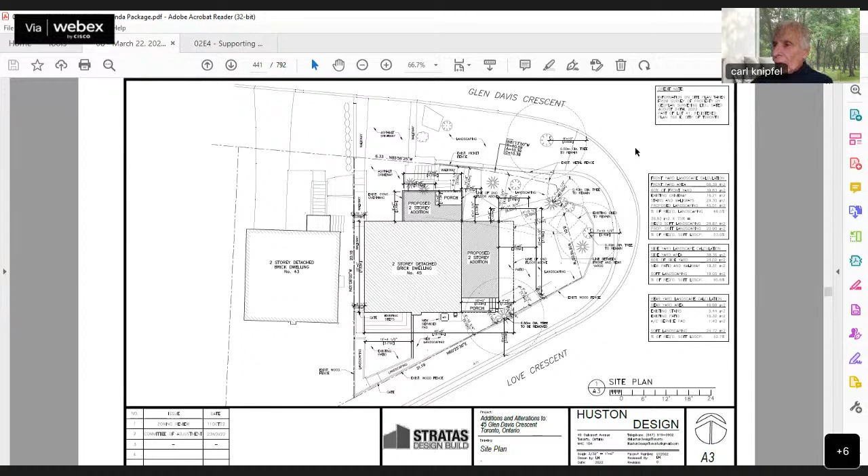I wonder if the Deputy Secretary Treasurer could clarify something, because the forestry recommendation is to deny variance number 2 and variance number 5, but then there's an addendum that says if we choose not to go with that recommendation, they recommend 2 other conditions, standard 1 and 2, which is submission of a complete application to injure or remove a city-owned tree, and an application to permit injuring or removing a privately owned tree. What is the actual effect of those 2 conditions? Does that effectively remove the tree, or allow for the removal of the tree, or not?

Through the chair, it means that the applicant would still have to go through the urban forestry process, and whatever urban forestry deems appropriate and acceptable, they will render their decision regardless of the C of A decision. So they've already indicated that they would block the removal of that tree. So this alternate suggested condition isn't really going to be very helpful.

Through the chair, that's correct. It would still default to urban forestry and an urban forestry application. Carl, I think they've indicated that they're prepared to be persuaded that this is something they may allow. I don't think they've slammed the door. Can I also raise the point that they also have some advisory comments?

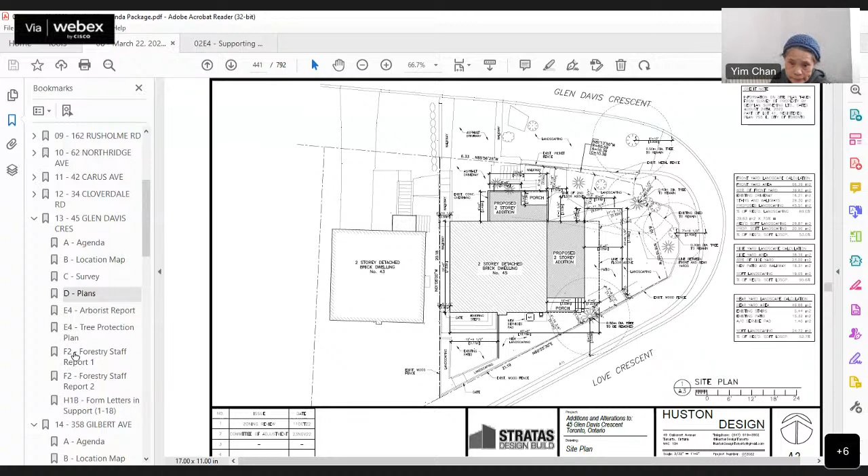Okay, any further questions? Okay, let's go into committee comments. Yes, Nimrod? This is a very odd-shaped lot in the way it's located and configured, so it does really constrain where you can build an addition. And unfortunately, in order to build that addition, that one tree will go. So I do understand what the applicant is saying. I think the variances, as amended, because one variance has been removed - that's variance number 7 - the other variances really reflect the condition of the lot, and I would move approval.

Subject to - was there a condition from urban forestry on a second memo? Effectively, Nimrod, as I understand it, with the clarification from the Deputy Secretary Treasurer, if you put any condition at all relative to urban forestry, the tree won't go, in which case the application won't proceed. So if what you want to do is approve the application, I don't think you can add a condition on forestry. That's the way I understand the advice we were given.

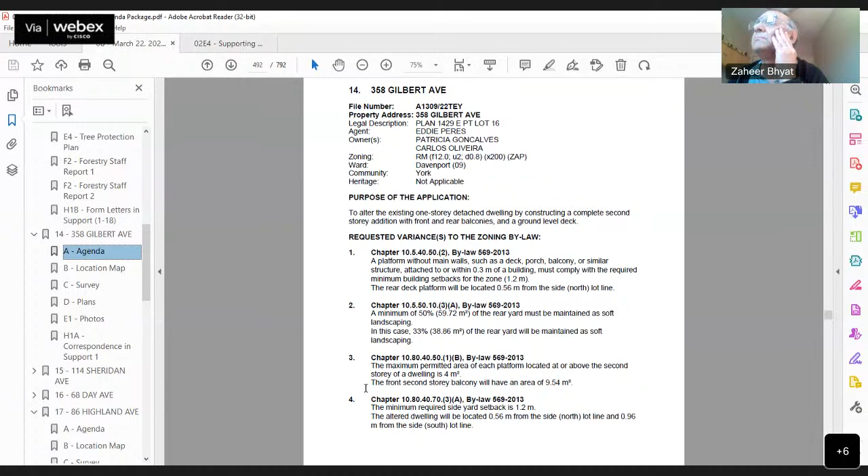No, sorry to interrupt. We're actually improving the condition. If you look at the survey, not ours, you'll see that there's a wood deck at the back and more concrete. We're actually adding more green. The only area that we're keeping that's not green is the area to enter the garage, so that's the only area now that's hard surface.

The rest is all going to be proposed as green. But if you see that site plan with the survey, you can see there's a frame deck that's going to be changed into green, so we're improving the green. There's not much more we can do because of the entry of the garage. There's no laneway at the rear, only access from the driveway.

Okay, just to the size of the balcony, it's quite a substantial increase. It's almost double the size that's permitted. Could you speak to that?

Well, it's not that big, it's less than 10, it's 9.54 square meters. It's not that big of an issue, and we also talked to the neighbors and put in a privacy fence on both sides of the deck, so it's not a big imposition. Planning is usually okay with decks up to 10 square meters, that's why they didn't put any notes on it. They're okay with it, so we're under 10 square meters, and it's a very modest deck. It's not that big.

And it's not infringing on any neighbors. On the other side is a shingle place where they manufacture shingles, so there's not really any housing there. And if I'm not mistaken, I think you've already indicated on the side elevation that there's a privacy screen. Yeah, that's correct. Thank you.

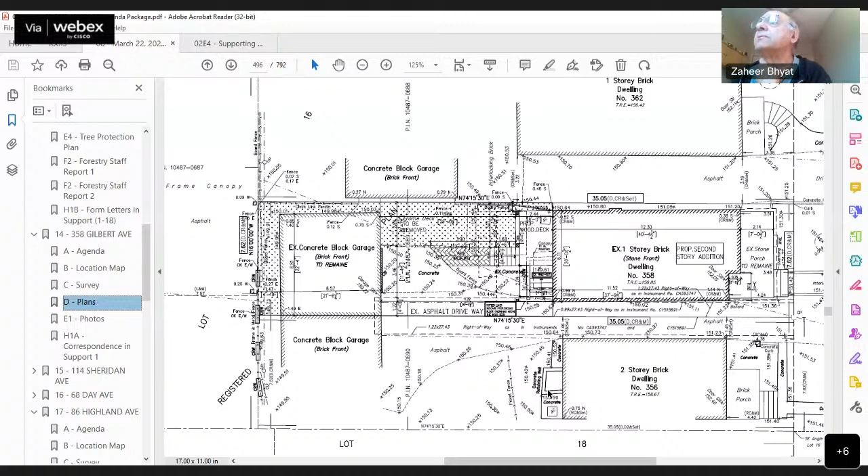That's great, thank you. All right, in committee, any comments? Yes, thank you, Chair. I think certainly the questions I had in mind are satisfactorily answered. I don't see any issues with this particular application. It's fairly straightforward, I don't believe there are any conditions attached. I'd be quite happy to move a motion to approve.

Okay, that motion, Carl? Yeah, could I just clarify? Here in the added material there's a recommendation from Metrolinx. It's not so much a condition as advice, we should probably reference it. Yes, certainly, that would be fine.

Okay, seconder, Carl? Second the motion. All right, all in favor? Have your approval. Thank you.

Number 15, 114 Sheridan Avenue. The purpose of the application is to alter the existing 3-story townhouse dwelling by constructing a rear second and third story addition. With this application, you have material submitted by the applicant and 2 form letters in support. Mr. Lipson.

You hear me? Yes. My name's Jack Lipson. I live at 137 Lisgar Street, and I'm speaking on behalf of my sister, who's the owner of 114 Sheridan Avenue.

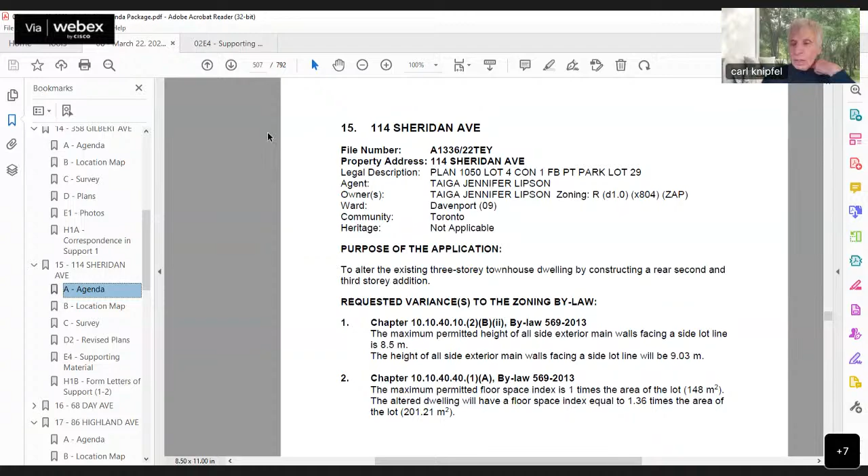Thank you, any questions, panel? Carl? Thank you, Mr. Chairman. Unless my colleagues have any concerns, as the applicant indicated, this proposal has the support of the neighbors on either side. It's a very modest rear addition, with a comparable footprint to neighbors on one of the sides. I don't see there being any negative implications to the application. I'd like to move approval without condition.

Seconders are here. All in favor? Have your approval. Thank you, thank you very much. Thank you.

Number 16 is 68 Day Avenue. Purpose of the application is to construct a 1-story ancillary building, detached garage in the rear yard abutting the laneway. With this application, we have material submitted by the applicant.

Mr. Rosenblatt, can we have your name and address for the record please? Mel Rosenblatt, 53 Neptune Drive, Suite 203, Toronto, M6A 1X2. Thank you.

I don't think we need a presentation. Do you have anything you want to say to the panel? I submitted a covering letter. I think it explained everything, and it's just a very simple minor variance that we're requesting.

Thank you. Any questions, panel? Yim, I would agree with that - a very straightforward application, no complication. I move for approval with no conditions.

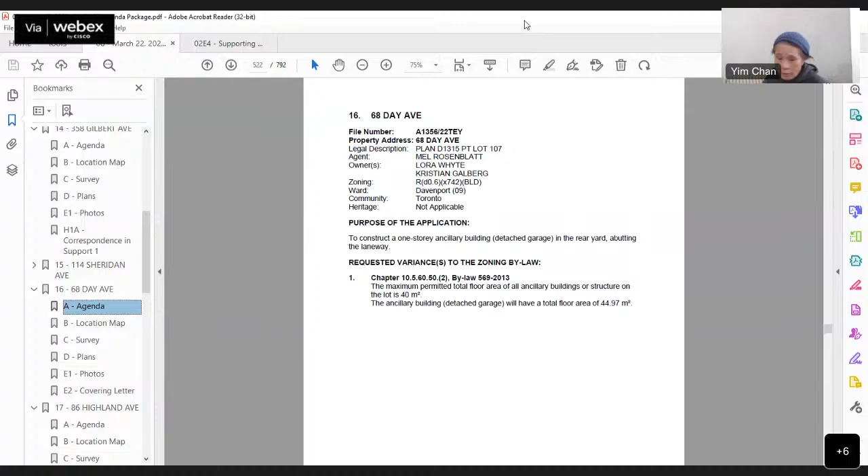So Carl, did you have a question? No, I was going to move a motion as well. That's fine, so will you second Yim's motion, Carl? Yeah, sure. All in favor? You have your approval. Thank you, sir. Thank you, committee.

Number 17, 86 Highland Avenue. Purpose of this application is to construct a new 2-story detached dwelling, a front covered porch, a rear ground floor deck, and an in-ground swimming pool. Also, the existing 1-story ancillary building, detached garage in the rear yard, will be maintained and unaltered.

With this application, we have material submitted by the applicant. We have support from 87 Highland Avenue. We have opposition from properties on Highland and Binscarth.

Mr. Dewson. Yes, hello, Mr. Chairman. I'm William Dewson, architect and agent for the owners of 86 Highland Avenue, and my address is 174 Bedford Road, Toronto, M5R 2K9.

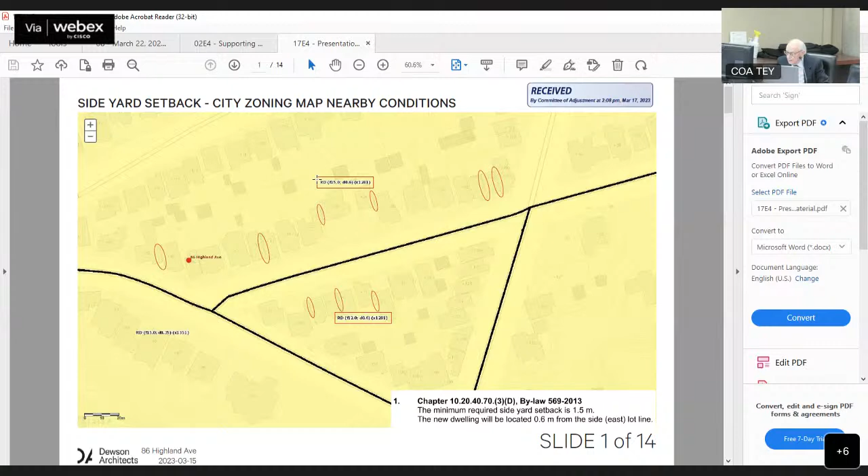Variance 1: the minimum side yard setback is 1.5 meters. The new building will be located 0.6 meters from the east side lot line. Referring to slide 1, note that the minimum required frontage on the north side, Highland Avenue and Binscarth Road in this RD zone, is 15 meters. On the south side of Binscarth it is 12 meters. The circled existing side yard conditions on this slide are all legal, non-conforming to those side yard setback bylaws.

Note that sentence B states for a minimum required frontage of between 6 to 12 meters, the required side yard setback is 0.9 meters. If the shift clause were employed, one side yard could be reduced to 0.6 meters. Refer to slide 3, please.

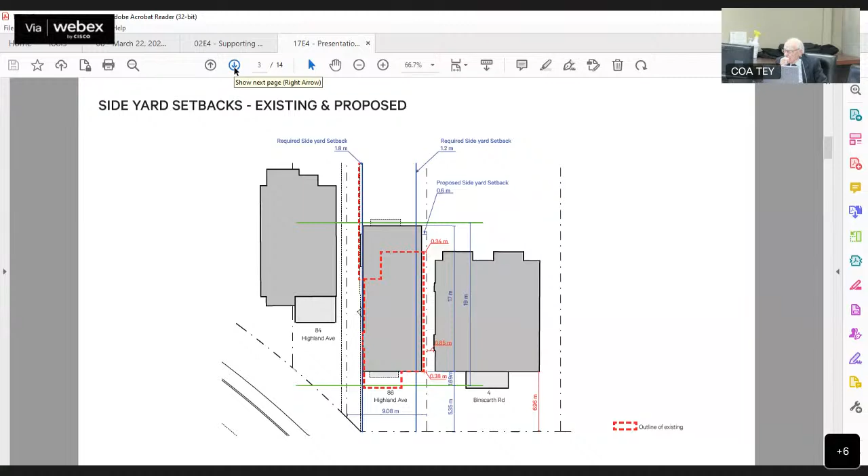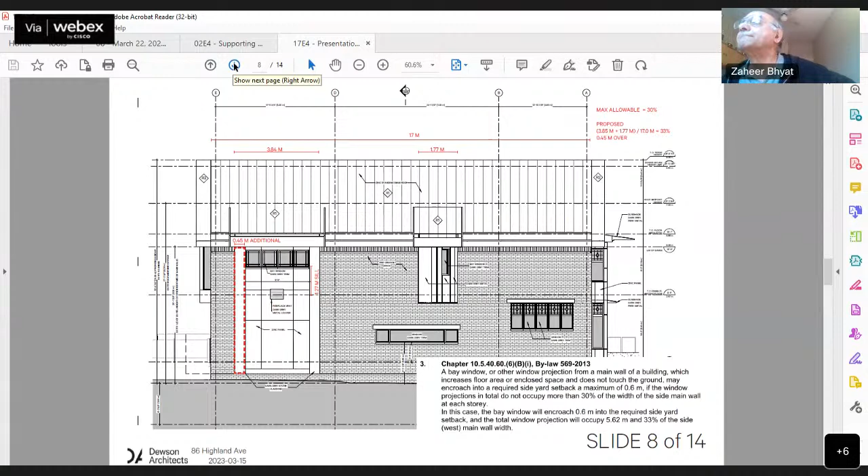In conclusion, we have secured approvals from the North Rosedale Residents Association, Heritage Preservation Services, the Toronto Preservation Board, and the local community council, with final city council approval pending. Thank you.

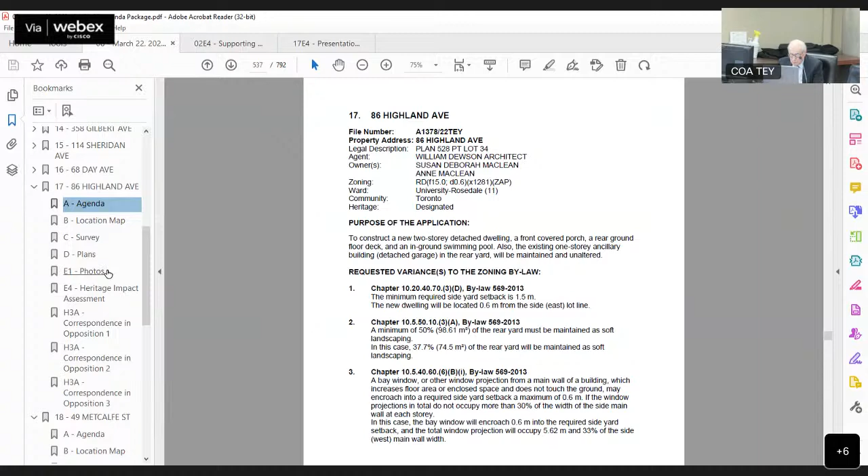We did an addition in 2010, and at the side yard where the addition is, we actually came in from where the existing house was, conforming to whatever the side yard variance bylaws were at the time. With the new house and the extension out the back, it is going to significantly affect all of the sunlight we receive at the back of our house. So it will be better if it's at the 1.5 meter required setback.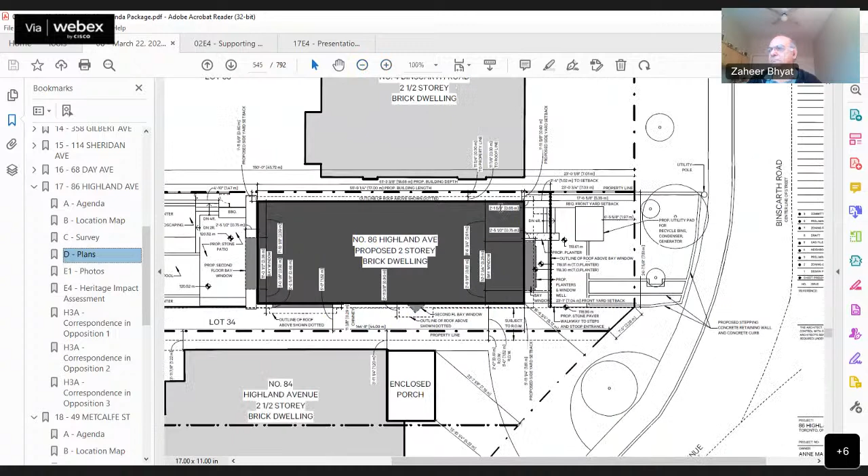Is that the only comment? No, my second objection is with regard to the projections of the bay windows on the west driveway side. Remember, this is a mutual drive; the houses are very close together. 86 Highland sits right on the right-of-way, all of it. We feel that further encroachment on the right-of-way is unnecessary and extraneous, and doesn't do anybody any good. We already have enough privacy issues, and we feel that this is in no way helpful.

Does the bay window interfere with your mutual driveway?

We feel it is impactful visually and for privacy reasons, and it's just not necessary. If you look at where our house sits versus the right-of-way, we keep well within it. 86 Highland sits on it, and to come further on it, further encroaching, we just feel is asking too much on behalf of his client, Mr. Dewson's client. We just don't think it's necessary.

But you're able to get your car where it needs to go? We are able to get a car, yes. I would hazard a guess that there could be problems if any heavy equipment has to get down that driveway. My house was built in 1910 or 1911, and I believe 86 was built at the same time. So these are narrow driveways we're talking about, and for any size of vehicle getting down there is always a worry unless you have a very tiny car.

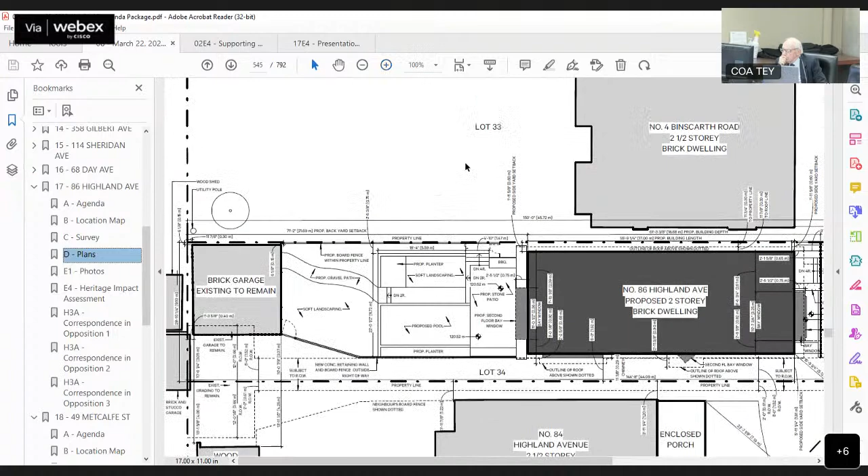Sorry, probably I can explain everything here. If you could zoom in to the site plan, you can see that we are restricted on both sides. We have actually moved the house a foot, or 0.3 meters, off the east property line, and we've also moved inboard from the existing house on the west property line.

So in fact the house is not built up to the easement line on the west side. On the west side, we're set back 1.8 meters, and we're asking for a variance to be 0.6 on the east side. I think we've done a very compromised position for both neighbors, pulling in both side yards from the existing condition.

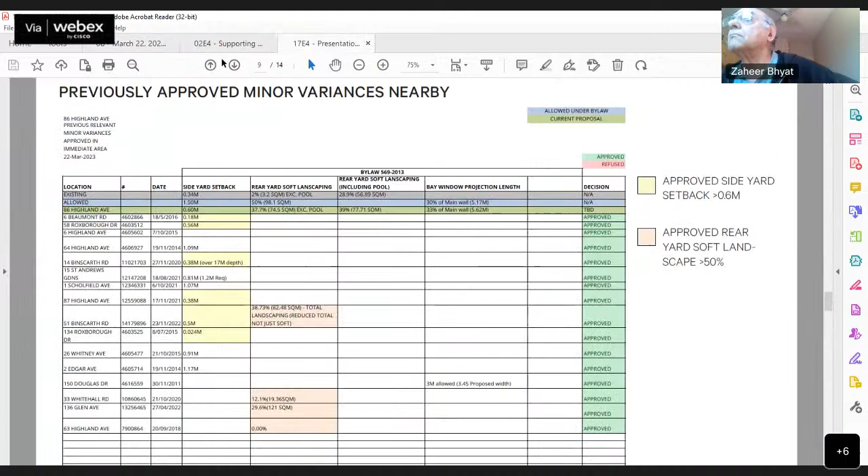Also, if I could address Ms. Callum's concerns, first of all the bay window - if you can look at our slide in the other slide deck, slide 13, that rendering, you can see that the bay window that projects on the second floor is well above the mutual driveway, and any car or SUV can easily pass through. You can also see the eaves line of Ms. Kellum's property is below the bay window projection on our proposal.

The bay window on her side, two steps up on her landing, is essentially at first floor and some 6 feet off the driveway datum. So it does present more of an obstruction than our bay window.

I'd also like to talk about, through the negotiations of this process, we've removed a number of minor encroachments that were existing, such as the front yard curb - the small concrete wall that's on our property. We've moved that back off of the encroachment. If you look at the existing survey, it was encroaching on that property. So we've cleaned up all of the encroachments that were there.

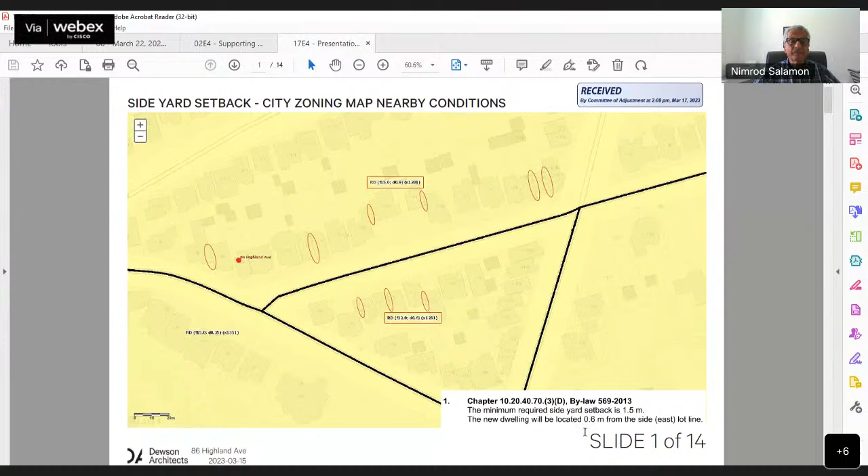The zoning for our district requires a frontage of 15 meters. If you zoom in on the north side of Binscarth and Highland, under the bylaw, a lot with a required frontage of 15 meters has required side yard setbacks of 1.5 meters, which can be shifted by 0.3.

Our actual frontage is 9 meters. I only display in the next slide that for a 9 meter lot, if this were zoned for our actual frontage, we'd be under bylaw sentence B, which for lots between 6 and 9 meters would allow a 0.9 meter setback. That isn't how the bylaw is written, which is the reason for minor variances.

In this particular part of Rosedale, we have a series of side yards up and down the street that do not conform. If they were to conform to the 1.5 meter setback, with our 9 meter wide lot, we'd only be able to build within 6 meters of building width. Here we have a setback of 1.8 meters on one side and 0.6 on the other, up to 2.4 meters, which I think is a reasonable compromise. Essentially, many houses on the street do not comply with the required side yard setback. Take a look at slide 4 of that deck.

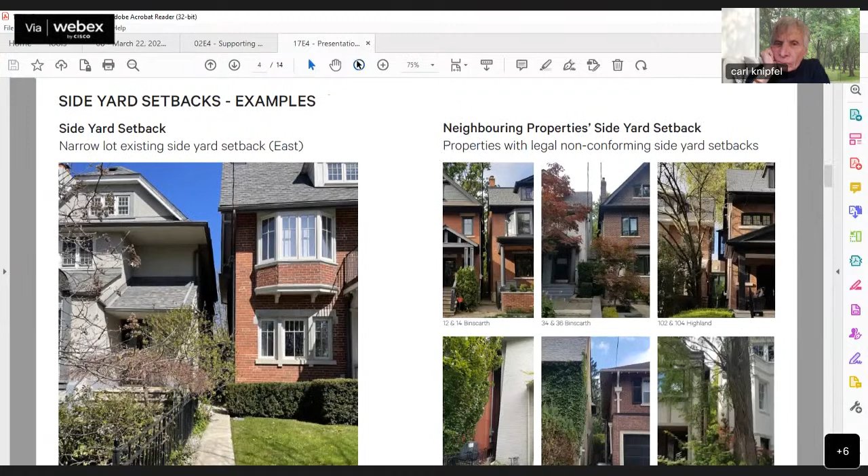Could I elaborate on what's being asked? The bylaw still requires 1.5 meters on your property currently, with an allowed shift of 0.3, so we could be at 1.2 meters on that side yard under the existing bylaw. We're asking basically for a variance to go to 0.6, which is an improvement of 0.3 over the existing condition. If we look at slide 4, on the left is our existing condition, which we'd improve by 0.3 meters.

If you look at the right-hand side, these are non-conforming conditions on our street, narrow lots in a zoning that requires a 15 meter lot, but these are all lots less than 15 meters wide, with further remarkably reduced side yard setbacks compared to the condition we're proposing. If we don't allow these variances, the buildable area on the lot is too mean to really construct a viable house. Looking at the survey provided, the house to your right has a side yard setback as low as 0.85 meters. Yeah, they don't conform either, a little non-conforming I guess is how it would be termed.

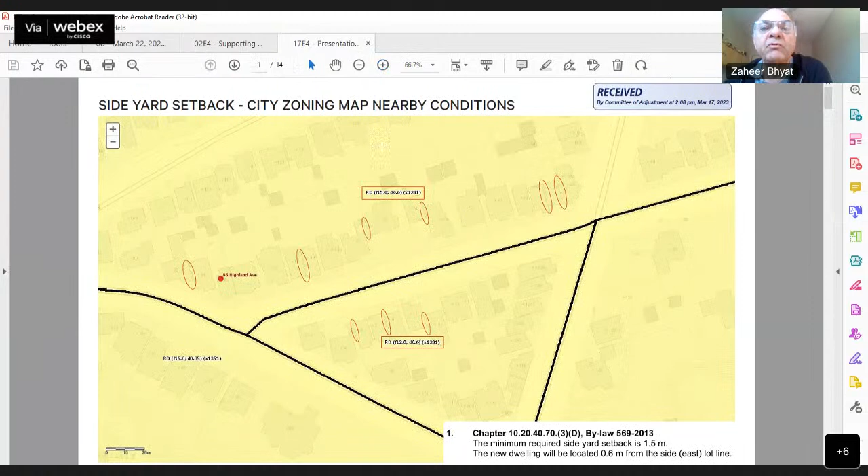Just a couple of quick points. First of all, thank you for the presentation materials, it certainly makes it a lot easier for me to understand what it is you're doing. A couple of comments, one with regard to the side yard setbacks from your presentation materials, it's clear that they're an improvement over what's existing at the moment.

I was particularly also concerned about the soft landscaping, and from what I can see, if you please assist me in understanding this, your existing swimming pool will be removed, and presumably you're going to have a much smaller pool in that space, and therefore have greater amounts of soft landscaping. Is that correct from what I see?

We are reducing the existing deck significantly. But I would say that the deck conforms to all height and side yard area bylaws.

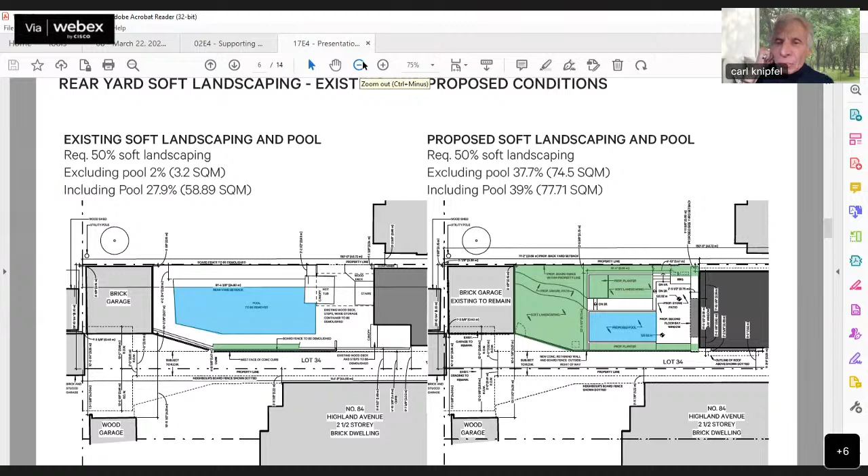I think in this particular case, the reduced side yard on one side makes sense, because the side yard on the other side is larger. What I have trouble with in many applications is when you've got a reduced side yard on both sides, and you've got this tiny sliver of space, which makes it almost impossible to move material from the street to the backyard, in which case things like garbage containers have to sit in the front yard, and that I think is problematic. In this case, as the applicant has indicated, he's trying to gain some space so he can create a viable house. He's got a minor side yard on the east side, but a larger one on the west side, which does allow for movement of materials from the front to the back. So on that basis, I think what is before us is reasonable.

And I did want to clarify that that pad has been moved from the front yard, because I do know that was a concern from some of the people who wrote in.

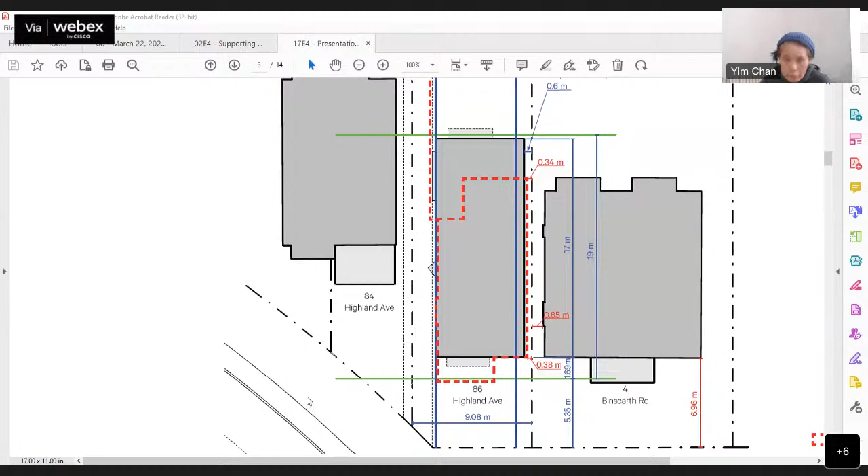Do we have a motion? Yes. I can move a motion with the variance number 2 amended to 39%, 77.71 square meters. And also I would like to tie it to the revised site plan showing the garbage container in a different location.

All right, did I hear you second that motion? Yes, sir. All in favor? Carl? Yes. Have your approval, sir. Thank you, Chairman and committee members, and thanks for your work that you do for all of us. It's much appreciated. Thank you.

Number 18, 49 Metcalfe Street. Purpose of the application is to alter the existing 3-story townhouse dwelling by constructing a new covered front porch and stairs. With this application, we have material submitted by the applicant and a report from Heritage Planning. Carolyn Spiegelski.

Hi, can you hear me? Yes, we can. Hello, good afternoon, Mr. Chairman and committee. My name is Caroline Spiegelski. I'm the applicant's agent and her architect. I'm also her neighbor at 51 Metcalfe Street, and the application in question is 49 Metcalfe Street.

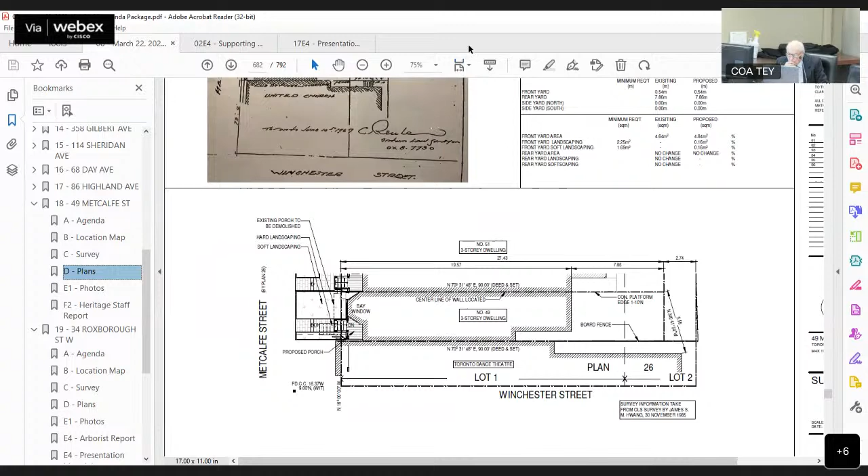So the proposed scheme seeks to demolish the existing larger covered porch. The new covered porch will be smaller and more in keeping with the historic architectural character of historic Metcalfe Street. We're also coordinating my own application for 51 Metcalfe Street so that the character of the two semi-detached units will look similar. So in fact, while we don't comply, the existing condition is actually worse than what we're proposing. We're more in character with the street, and we're also increasing the soft landscaping marginally on the city side.

And I think that pretty much covers it. If there's any questions, happy to answer them. Over to you. Questions, panel? Okay, let's go on to committee comments.

Chair, sorry, it appears that there's a speaker on the line for this application. It's the owner, isn't it? I believe it's the owner, Catherine, who's also on the line. Yes, okay, perfect, thank you. Just clarifying, there's only one variance before us, and it's actually improving the existing condition.

I would move approval of the variance with no conditions. Oh, I believe there's heritage planning conditions. What condition? Heritage planning. So, here, you second the motion. Yes. All in favor? Have your approval. Thank you. Thank you so much.

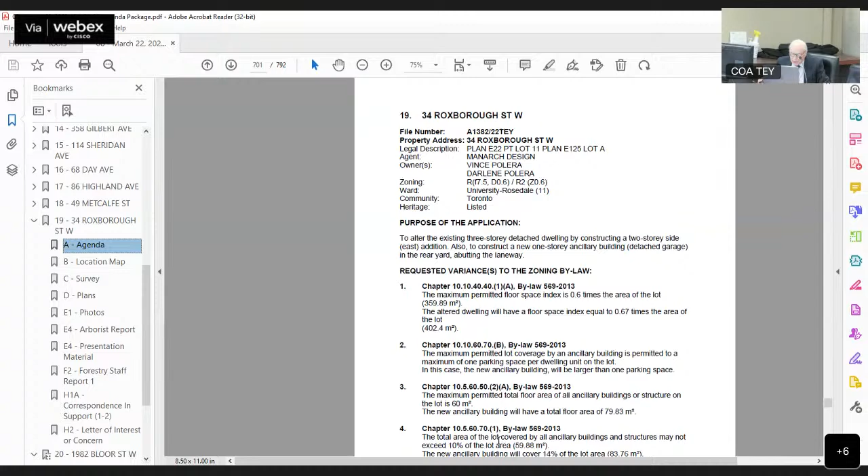Number 19, 34 Roxborough Street West. Purpose of this application is to alter the existing 3-story detached dwelling by constructing a 2-story side east addition, also to construct a new 1-story ancillary building, detached garage in the rear yard abutting the laneway. With this application, we have material submitted by the applicant, a report from Urban Forestry, correspondence of concern from 30 Roxborough, and support from 2 form letters for 38 and 67 Roxborough Street.

Mahir Manios. Yes, Mr. Chair, I'm Mahir Manios, the agent for the owner, number 1 Teakwood Grove, Toronto, M3B 2H9. Okay, I don't think we need a presentation from you. Do you have anything you want to say before we go into committee? I won't take long, but if staff could be kind enough to put up the supporting material.

Page 3 is a marked up site plan that we had submitted a few days ago. It gives a better idea of what we're proposing to do here. The existing house is over 20 meters deep. We're proposing to demolish the rear over 3 meters of the existing house, shown on the site plan, and then put the 2-story addition on the side of the house. This would bring the depth of the house into compliance, less than 17 meters.

It's set back more than 1.2 meters from the east property line versus the required 0.9 meter. We had argued with zoning that we don't actually need the variance for FSI because we're smaller than the existing house. We're proposing 67%, whereas the existing house is almost at 69%. There's a provision in the bylaw to that effect, but the zoning examiner didn't see it fit to use that provision. Additionally, the ancillary structure, a detached garage at the back, is also shown on the site plan.

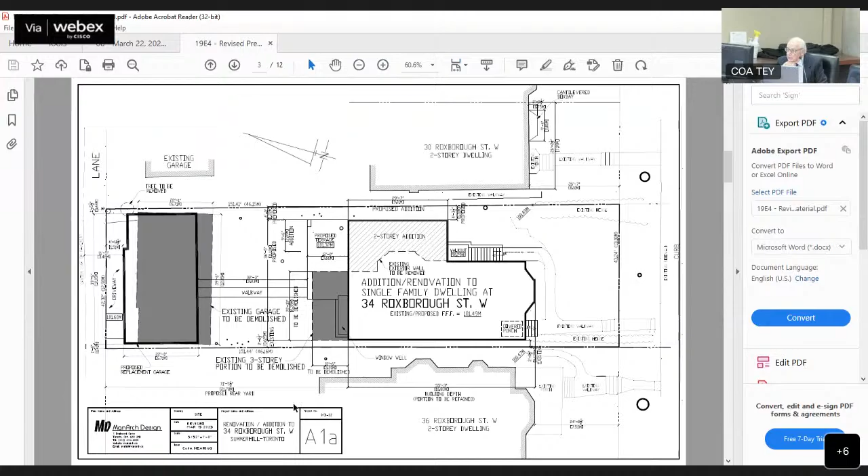Nimrod: Yeah, I think the variances are minor in nature, and the new triple car garage is really a replacement of what's currently there today. I would move approval subject to urban forestry condition number 2.

Seconder, Sahir, all in favor? Yim? You have your approval, sir. Thank you.

Number 20, 1982 Bloor Street West. Purpose of the application is to permit a learning center use, a children's cooking school, within the 2-story building. We have materials submitted by the applicant and a report from the Development Coordinator, Toronto Transit Commission.

Mr. Grossi. Good morning, Mr. Chair. Can we have your name and address, please? Of course, Adam Grossi, 5451 Highway 7, City of Vaughan.

I don't think we need a presentation from you, sir. Do you have anything you want to add before I go into committee? Only that commercial uses have existed in this particular space within the building for a number of decades. The previous tenant was a pub. They vacated recently, and in order to fill the space, we were required to submit the application to permit the children's cooking school, which, as you can probably imagine, isn't a typical use found in the bylaw.